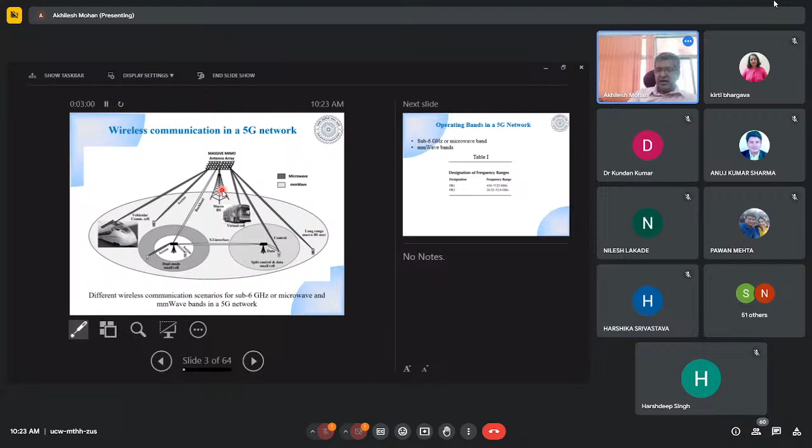Microwave is for the communication between the tower and the devices, the mobile phones or the networks, and the millimeter wave is for the backhaul or short distance communication. So these are the two major bands of frequencies which are going to be used for the full 5G network. Now, what are these frequencies? That we are going to talk about.

There is the sub 6 gigahertz microwave band. Sub 6 gigahertz means the frequencies below 6 gigahertz. It is basically the frequencies below 7 gigahertz. Just for the namesake, they have given it sub 6 gigahertz. Another are the millimeter wave bands.

What they have decided to use is FR1 and FR2, that is frequency range 1 for the microwave range and frequency range 2 for the millimeter wave. That is 410 megahertz to 7125 megahertz for the mobile communication, and for the backhaul or short distance communication, 24 to 52 gigahertz they have planned.

Based on these frequencies, they have given names to the bands, NR1, NR2 till NR95, for the lower microwave frequencies for different applications. For WiMAX, Wi-Fi, wireless LAN, and device-to-device communication, they have given a lot of specific bands. They are still allotting new bands, and each channel has a bandwidth depending upon its application, that is 50 megahertz or 100 megahertz.

Apart from that, they have given 4 bands for the high frequency, that is NR257, 258, 260, 261, for uplink and downlink. Now the main challenge is that in mobile communication, we must have both the bands at the same time. That I am not going to discuss here. I will discuss how to design the antennas for these bands, how to design the MIMO antennas, and what are the challenges in designing MIMO antennas at these frequencies.

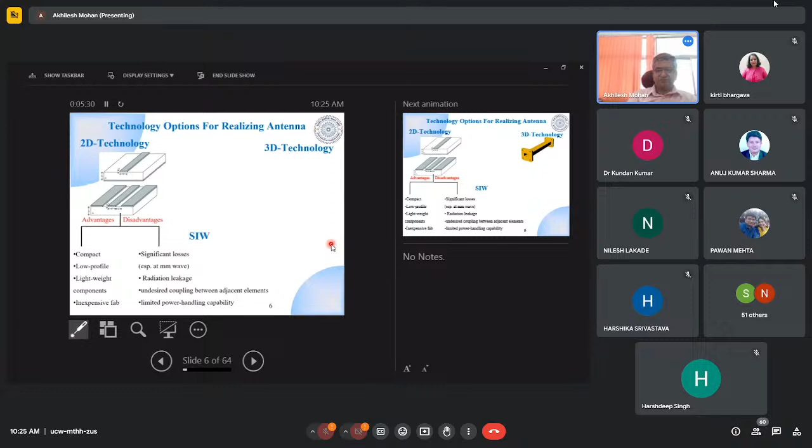The disadvantages are they have significant losses if we move higher in frequency, especially at millimeter wave frequency. They have radiation leakage and undesired coupling because most of the structures are open, and they have limited power handling capability due to the presence of the dielectric material.

Another technology is 3D structures. They have the advantage of low losses, good quality factor, and high power handling capability. But they are heavy, they require expensive fabrication, which requires a CNC machine, and transitions are required if you want to connect to planar circuits.

Researchers in 2000 thought, why can't we combine the advantages of 2D technology and 3D technology? So they came up with a new type of structure called SIW. It is a planar form of a rectangular waveguide, where the top and bottom walls are realized by the top and bottom cladding of the dielectric substrate, and the side walls are realized by a series of metallic vias. So this is called SIW.

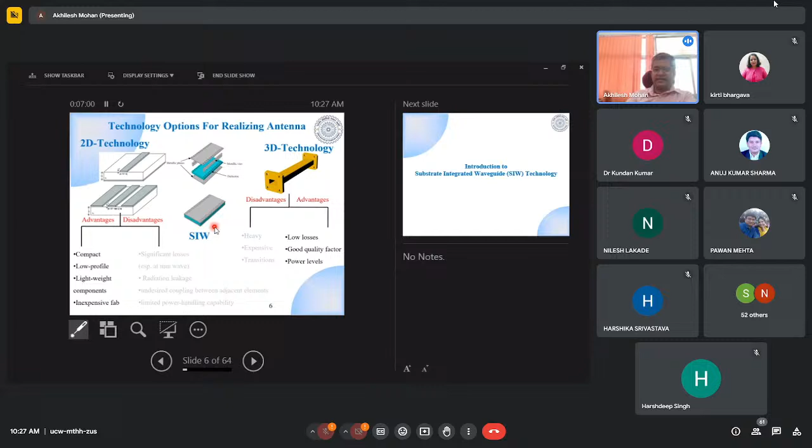We can say that SIW, substrate integrated waveguide, is just a rectangular waveguide filled with some dielectric material. So it has all the characteristics of the rectangular waveguide and some of the characteristics of 2D planar structures. It is a planar structure with characteristics of both technologies. Now, introduction to SIW technology. So, history.

So the word SIW was coined much later. Before that, there was a group in Japan that gave the waveguide line. They filed a patent in 1994, and they proposed a parallel plate waveguide which has similar characteristics to SIW. After that, they gave the development of the laminated waveguide.

Different names were given. But the major work was started by Wu and his group in 2000 in Canada. They established this SIW transmission line. They calculated its characteristic impedance, propagation constant, attenuation constant. They did all sorts of characteristics.

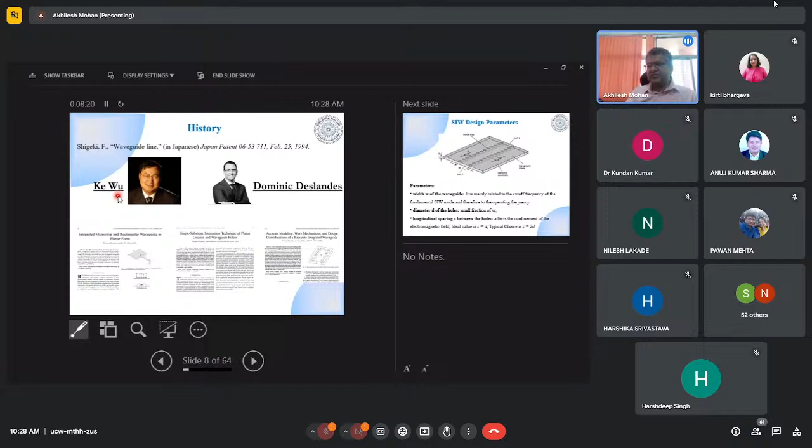At those times, computers were just there, so they did it by using empirical formulas, and they are still valid now. And they showed how the new technology can be used for the design of microwave components. In the next 20 years, numerous papers have been published, and SIW has been applied in numerous microwave and high frequency circuits for the design of filters, antennas, oscillators, with some better characteristics.

Now, some of the SIW design parameters. What are the design parameters? It is a rectangular waveguide, so it has a parameter, the width of the waveguide. It is mainly related to the cutoff frequency. As you know, the rectangular waveguide has a cutoff frequency, and the dominant mode is the TE10 mode. So SIW also basically supports the TE10 mode. Then there is the diameter D of the metallic via holes, and the longitudinal spacing between the via holes.

The ideal choice, to have an identical implementation of sidewalls, is S equals D, but the typical choice is S equals 2D. It has been found through EM simulation that if we choose S equals 2D, that is, separation between the vias equal to two times the diameter of the vias, the electromagnetic field will be confined in this structure and will flow. There won't be any leakage from this structure.

Okay, now SIW. As I told you, it supports TEn0 modes only. It doesn't support TM modes, because for the support of TM modes, it requires longitudinal, Z-direction current on the sidewall. Since the sidewall is discontinuous along the Z direction, it doesn't support the TM modes. It only supports TEn0 modes.

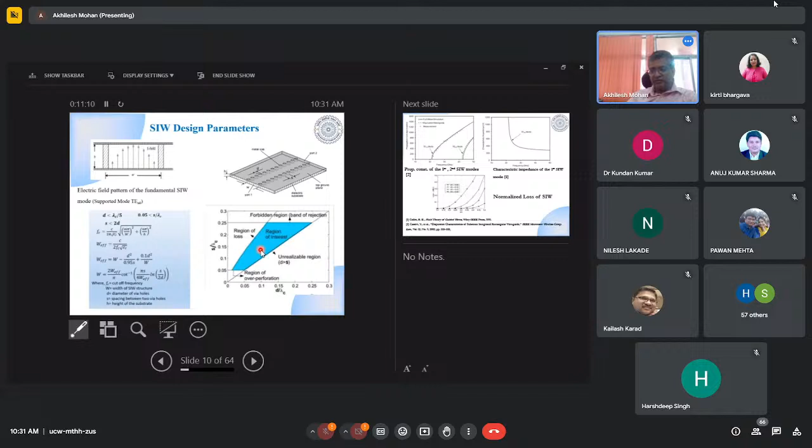You cannot choose any value of S and D, the spacing between the vias and the diameter of the vias, for the propagation of the electromagnetic wave. The blue region shown here is the only region of interest. Other regions are either unrealizable, the region of loss, or band rejection. So S by lambda C and D by lambda C have to be chosen only in this region for proper propagation of the electromagnetic wave in SIW, that is, substrate integrated waveguide.

Now, as I told you, for any transmission line we require the propagation constant and characteristic impedance, basically gamma and Z naught. The group calculated these numerically. They found that for the TE10 and TE20 modes, it is similar to the rectangular waveguide, and the characteristic impedance is also similar to the rectangular waveguide, and they provided a design chart which can be used for the design of microwave components.

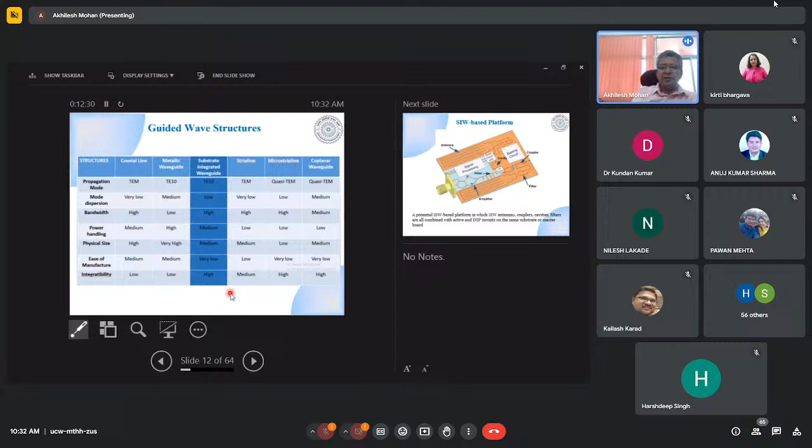Okay, so it is something in between. If we compare SIW, substrate integrated waveguide, with other guiding structures, that is, coaxial line, metallic waveguide, stripline, microstrip line, coplanar, it is not as good as a metallic waveguide, but it is in between. It is better than the 2D planar structures and somewhat inferior to the metallic waveguide, but with ease of fabrication and somewhat higher power handling capability than the other 2D structures. That is why it is more popular nowadays.

So this is one of the transmitters they have designed, or they have just shown how SIW, the entire thing is basically antennas, couplers, and they have oscillators. Most of them are using the SIW technology, and if you want to use it, you have to apply certain chips for signal processing and for down conversion. So this is how an SIW-based transceiver will look. So now we have to understand how to design the SIW antennas, couplers, filters, and so on. Okay, so I have discussed the advantages and the limitations.

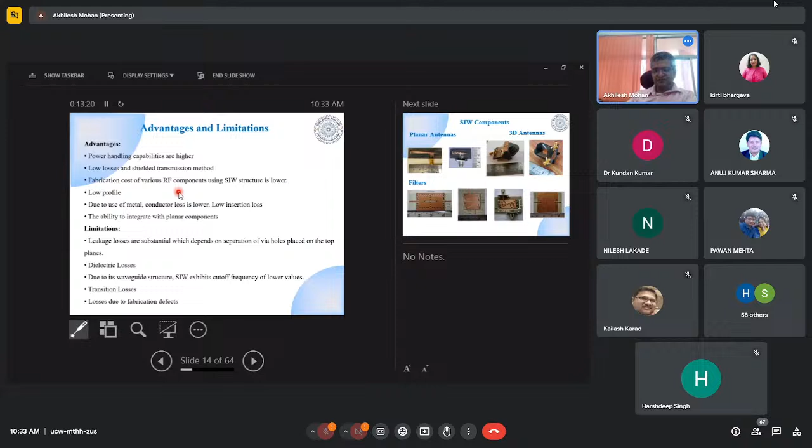So these are some of the components which our group has designed. We have designed some of the planar structures, planar antennas, 3D antennas, and planar filters. So now we will discuss the SIW antennas. Before starting, first of all, I will discuss the rectangular SIW cavity.

So this is a rectangular waveguide cavity. How is it formed? We have the same SIW technology. If we close the front and the back side with another series of metallic vias, we will get a cavity. This cavity will be equivalent to the rectangular cavity. It will have all the features, and all the formulas are applicable. The only difference is that earlier the length was LC and WC, now it has been modified to L effective and W effective.

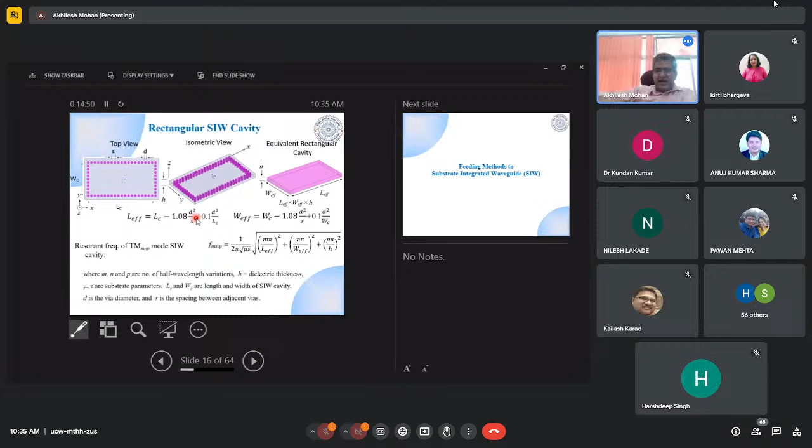This L effective and W effective are calculated empirically. They have calculated for different substrate parameters and different heights, and they have come up with some empirical relations. If we use this relation, we will get the correct resonant frequency of our SIW structure. Okay, now this was our rectangular SIW cavity. This acts as a microwave resonator, which we will be using for the design of antennas and filters.

Now feeding to the SIW. The main thing is that if you have any structure, you have to launch the power. So how do you launch the power? There are different types of feeding techniques. First of all, at this side you will have 50 ohm, and at this side you have the impedance of the waveguide, whatever mode you are choosing. So you have to match this impedance and this impedance. So a taper-based transition is used. This is very popular. This is one of the simplest transitions.

Apart from that, the coplanar to SIW transition, where a current probe is used, and another one is the coplanar to SIW with 90-degree bends. Here also you have the 50 ohm, and to match the 50 ohm to this one, 90-degree bends are used. Basically you have to match the fields of the feed line to the SIW in order to launch the power properly. Whatever power you are launching should not reflect back. It should go inside the waveguide.

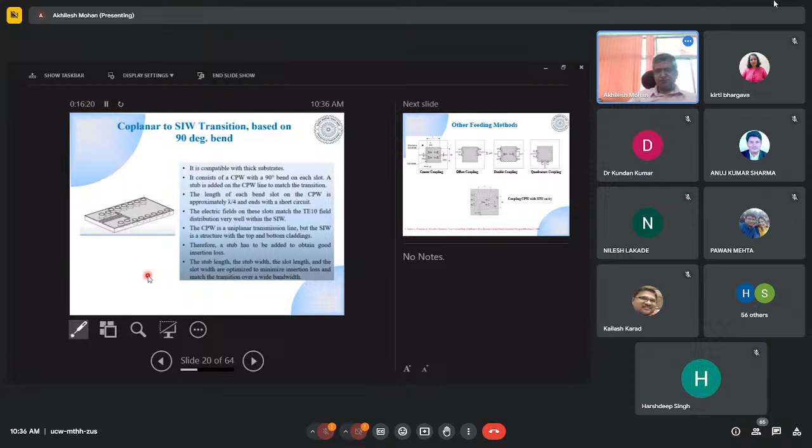Okay, now people have presented different other feeding techniques, that is corner feeding, double feeding, offset feeding, then quadrature feeding. Some of them have advantages, some disadvantages. When I discuss some of the components, I will discuss what type of feeding technique you should choose.

Okay, now first of all, we should study the modes of the SIW square cavity. So this is your SIW square cavity. As I have shown you the rectangular waveguide cavity, this is just a square. Its 2D view is something like this, and the 3D isometric view is like this. Now in the 2D view, I have plotted for this dielectric substrate the first few modes, that is the TE110 mode.

So basically it supports, as I told you, the TE MN0 mode. It will not support TM modes because the waveguide walls are discontinuous. Now, TE110: the first index shows the number of half-wavelength variations along the x direction.

The second index shows the number of half wavelengths along the y direction, and the third index shows the number of half wavelength variations along the z direction. So in this nomenclature, this is your x, so it has one variation along the x direction, and along the y it also has one variation, and there is no variation along z because the thickness is very small. H is very small compared to the other dimensions, so there is no variation of the fields along the z direction. That is why it is TE110.

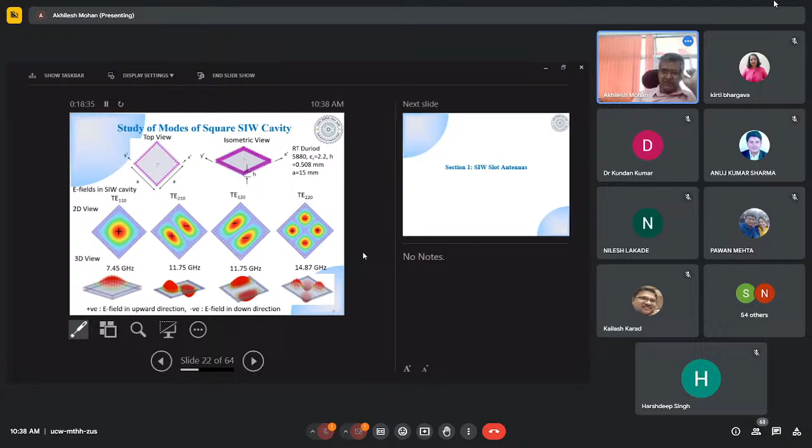Now, SIW slot antenna. First I will talk about the slot antenna. What is a slot antenna? A slot antenna is basically a metal surface, usually a flat plate, in which one or more holes or slots of different sizes are etched or cut. Now this slot will radiate. It will act as a dipole.

Go back and study what the Babinet principle is. A slot acts like a dipole, in a similar way to a dipole antenna. So it will have an omnidirectional radiation pattern. Only the plate is there. So it will have an omnidirectional radiation pattern, and a figure-of-8 pattern in the two planes. The shape and size of the slot determine its resonant frequency, the operating frequency of this antenna.

Now, the main advantage of this slot is that it's very simple and you can design it in a planar structure. You just take a sheet and it will radiate. But the disadvantage of this slot is that you have radiation at both ends, front and back. If you want to design a directional antenna, it should radiate only in one direction. That is why this slot has been modified with a solid cavity kept behind it. That is called a cavity backed slot antenna.

Here, this cavity is of λ/4 thickness because it is shorted here. So it should not load the slot, because a λ/4 shorted section acts as an open circuit here. So this will act as a radiating slot. When you excite this cavity in a particular mode, this slot will radiate.

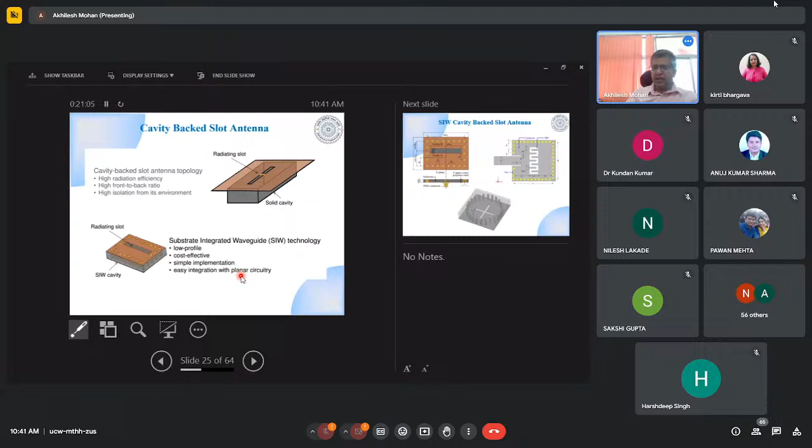Now, for the cavity backed slot antenna, you can find numerous different types of slots in the literature. The theory behind everything remains the same. You have to excite a particular mode of the cavity, feed the cavity, etch a slot, and this slot will radiate at the desired frequency. Here they have taken a rectangular cavity, a square cavity, and a circular cavity, and different types of slots are etched. The theory is all the same.

So what is the design flow chart? You have to choose the cavity, then study all the modes of the cavity. SIW will have different modes. As I showed you, TE110, 210, 220, and all the modes are there. So you have to first look at the cavity, then the mode pattern and the field configuration of these particular modes.

Then you apply, this structure will support the modes, then you apply the feeds to excite the particular mode, then place the radiating slots at the strategic location. That I will tell you how to do. Then finally this slot will radiate and you will get your cavity backed slot antenna, and you can get it for the different dimensions, impedance, bandwidth, polarization depending upon the requirement, and finally you fabricate it and you will verify the characteristics. So this is the design flowchart of your cavity backed slot antenna.

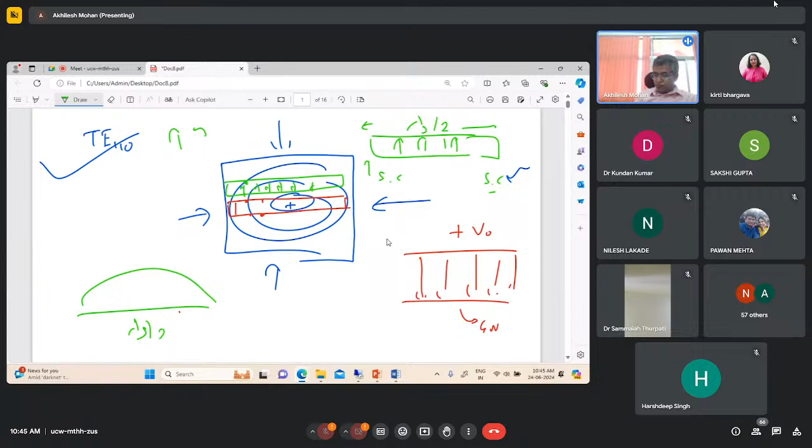Let's say this is your Y. So a Y polarized electromagnetic wave will be radiated from this slot antenna. It uses only the TE110 mode, the first mode, and this length will be lambda G by 2, because it is short circuited here, and the length between two short circuits is lambda G by 2. So its bandwidth is very small, around 1.7%.

Now we want to increase the bandwidth. So we can use the higher order modes. How to use higher order modes, this I will discuss. Here they have used TE110 mode and TE120 or TE210 mode. Let's take TE120. You will have fields like this and this. So this is plus, this is minus, and this is TE110 mode, and TE120 mode here plus.

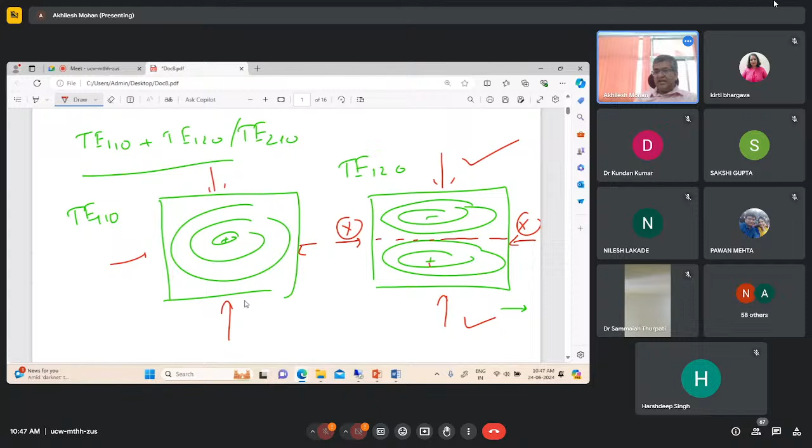Now, if you feed from this side, both the modes will get excited. But if you feed from this side, this mode will not get excited. Why? Because this has zero fields. It is maximum here, then zero, and then minimum. So you have to feed from either this side or this side, and then both the modes will get excited.

So we will feed from either this side or this side. Okay, so this mode and this mode, both will get excited, plus minus. Now the question comes, where to etch the slot? If I etch the slot at the center, will it radiate?

It will not radiate, because as I told you, it will have the equipotential. But if I etch the slot here, then what is going to happen? It will radiate because there is a potential difference. So as I told you, positive to negative, so it will radiate.

But if I etch a slot at any other location, let's say at this location, then what is going to happen? Both of them will radiate. Why? Because here you will not have the equipotential surface, so you have the potential difference. Also you will have the potential difference, so both slots will radiate.

So this works. They did it here in the second example, where they have taken an offset from the center. One more thing, they have made the cavity rectangular to bring the second mode closer to the first one.

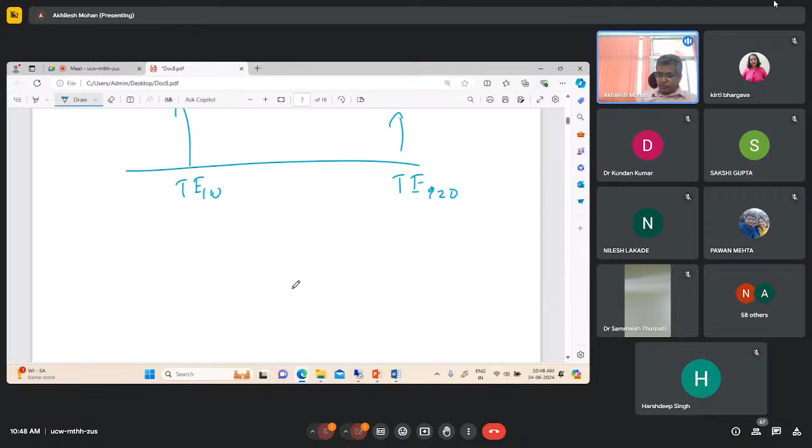So to bring the second mode earlier, let's say TE110 mode is here and TE120 mode is here. As you know the formula of TEMN0 mode, it is something like m pi by A, n pi by B, plus p pi by C, whole square.

So now if I choose in such a way that the width of the waveguide is longer, then this mode will be brought closer to each other, so it will become 1 to 0.

Now these modes can be amalgamated and you will get the wideband response. So in this case they got the bandwidth improved from 1.7 to 6.3 gigahertz.

Another one is they have designed the SIW, which is much broader. As you know, butterfly shaped structures are known for their wideband characteristics. So basically butterfly structures are wideband structures.

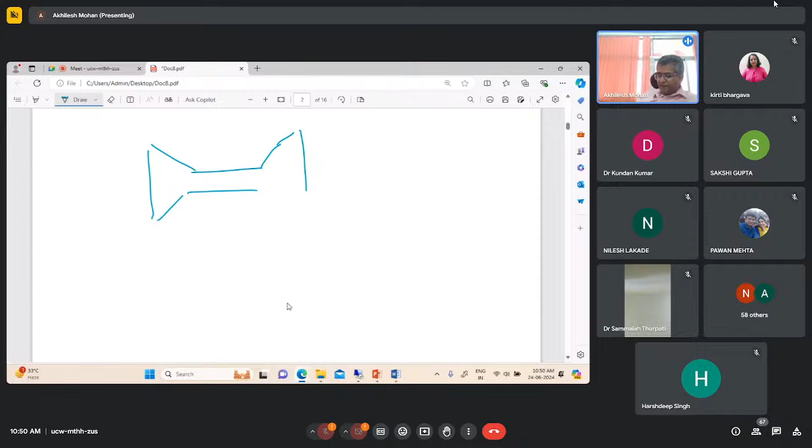So what happens, you have the butterfly, something like this. It is basically etching multiple slots of different lengths. First they take a broader length, then a shorter length, and so on, so it becomes just a wideband structure, and you get the wideband characteristics.

So these are some of the SIW slot antennas. Now, how to use this slot antenna for the design of the MIMO antenna, that is the SIW MIMO antenna, that they have shown.

This is the simplest one, presented by Z. N. Chen in 2015. They have straightforward introduced it at the center and center fed it. Four different type cavities are kept side by side, and they have applied orthogonal polarization such a way that the isolation between them will be high.

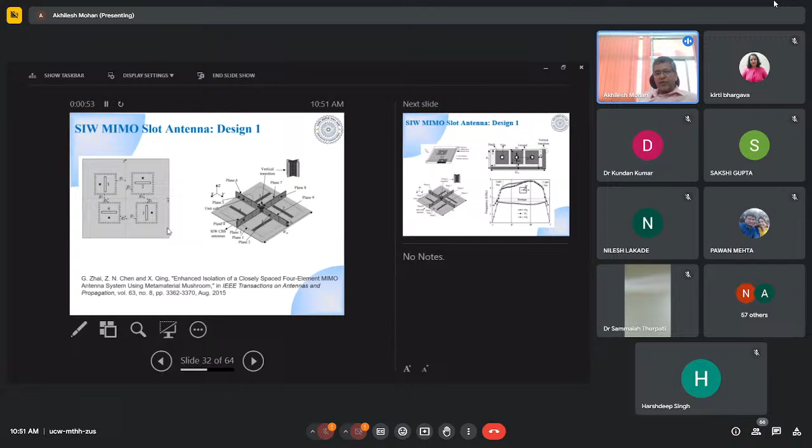Apart from that, they have applied metamaterial based structures and calculated its propagation constant. This metamaterial structure's omega-beta diagram shows band gap characteristics. They have designed the antenna for 2.4 gigahertz and designed the band gap structure such that its band gap lies at 2.4 gigahertz.

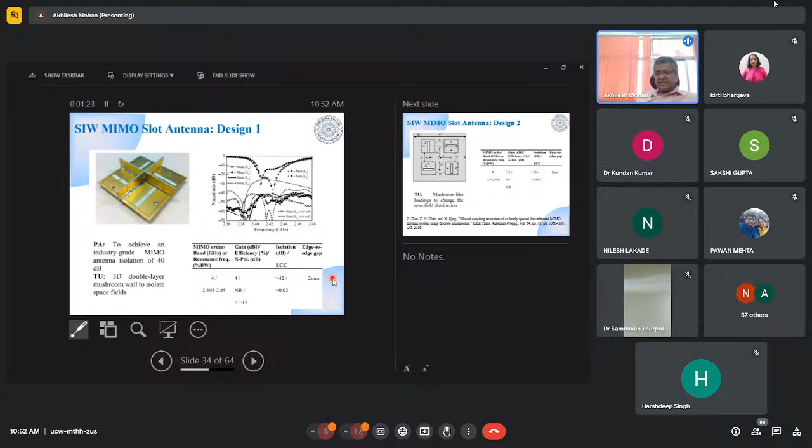So there won't be any flow of electromagnetic power from this side to that side, giving better isolation between the MIMO antennas, as shown here. They got very good isolation of 42 dB, with an edge to edge gap of only 2 millimeters, which is very small.

So they got some isolation of 25 dB. Now another one from the Kundan itself. So what they did is they have used some half mode structures kept side by side in such a way that they applied the orthogonal feeding structure.

Also, they got isolation better than 24 dB. In all the above structures, they have applied some decoupling network type of structures, mushroom-like structures, and something like band gap structures, and they have got it.

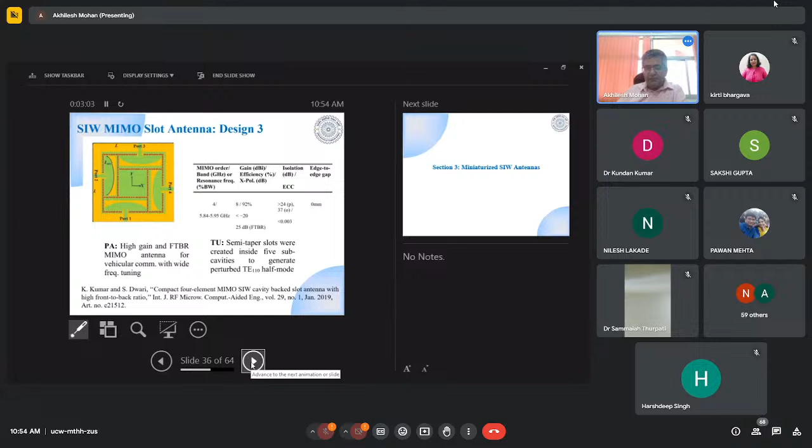Now another is miniaturized SIW. This is my third section of my talk, miniaturized SIW antenna. So what do you mean by miniaturized SIW antenna? All these modes, if you see, are using the full modes. Full modes means you have the full SIW cavities for the design of the SIW antennas. Now several miniaturized versions of the SIW antennas are there, which are used for the design of MIMO structures. So what are they? I will discuss here.

So we have the circular SIW cavity whose dominant mode is TM010 mode. Now this is your full mode. Now if I apply the magnetic wall concept, meaning an open circuit concept, then what happens? If the fields are symmetrical around any plane, applying the magnetic wall concept allows you to bifurcate or reduce the size of the structure by half while retaining its characteristics. Resonant frequency, everything will remain the same, so the size will be reduced to half. This is called half mode SIW cavity, something like a semicircular cavity, so half mode.

Similarly here, if I bifurcate along here, the first cavity is bifurcated along any plane, so you get half mode. Now if I bifurcate along this, the basic thing is you have to bifurcate along the symmetrical plane. If you apply bifurcation here, you will get the quarter mode. Similarly 8th mode, 16th mode, and so on. This is circular cavity bifurcation.

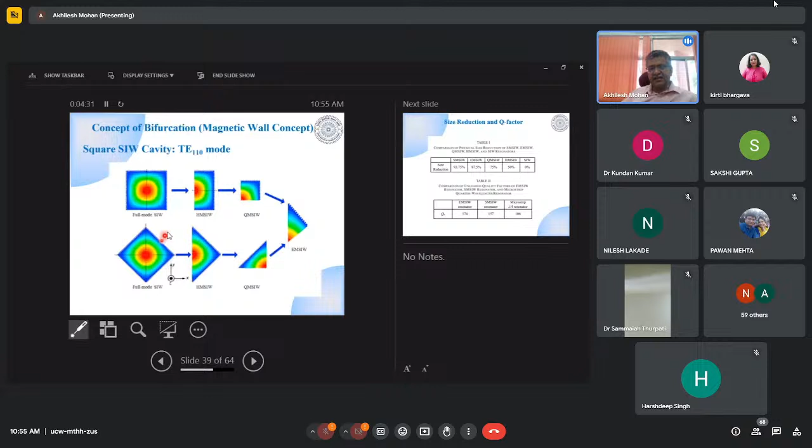Similarly, you can think of bifurcation in the SIW cavity, whatever I have discussed. So full mode, half mode, quarter mode, 8th mode. This is bifurcation along the center. If you bifurcate along the diagonals, you will get something like this - half mode, quarter mode, and EMSIW. So all these structures have similar characteristics, but size will be reduced to half.

Now comparing this with the other SIW structures, the size reduction in the 16th mode or whatever mode - if you have full mode cavity, it is 0%, similar. Now half mode gives 50%, so significant size reduction is obtained. Also, if you observe the quality factor of these things, it is more or less similar, not much degradation. If full mode has a cavity quality factor of 200 something, it will have 175 or something like that. So basically it is somewhat reduced, but the size will be drastically changed.

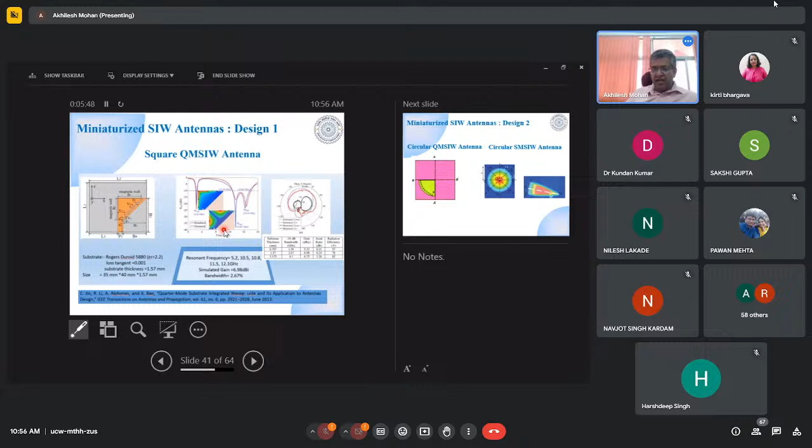Now if you see the circular SIW cavity, what happens? In circular SIW cavity, this is quarter mode and this is 16th mode. If fed from a coaxial feed, what they got is circular SIW antenna radiation characteristics. So we can use this type of antenna for the design of MIMO antennas.

So the miniaturized SIW antennas for microwave, that is for MIMO antennas - now the first example is shown here. They have taken two QMSIW cavities, coaxially fed, and applied a decoupling structure at the side walls. To get good isolation, they achieved an isolation of 18 dB. And another one there, it was 2 cross 2, meaning a 2 port MIMO structure.

That is for the 5G MIMO antenna. They have realized that. Now another is for high order, they have applied the 4 type QMSIW structures. This structure is much more simpler or compact than the full mode structures presented earlier, but isolation is somewhat poor. However, there are different methods by which we can enhance the isolation.

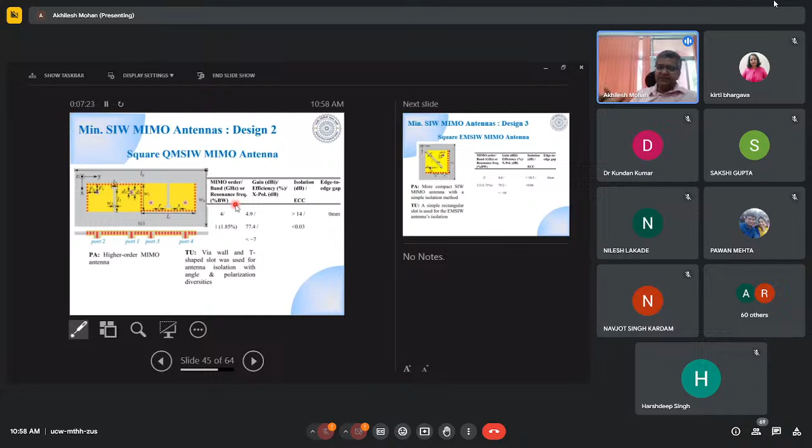20 dB isolation can be easily obtained by etching the slots or by placing the VRs. Here they have placed 2 similar structures like this and this one. So they have used a further 8th mode, and isolation of nearly 18 dB has been obtained.

After that, numerous types of structures can be used, and it is up to you how you place this structure to get the polarization diversity or pattern diversity, to get the enhanced isolation.

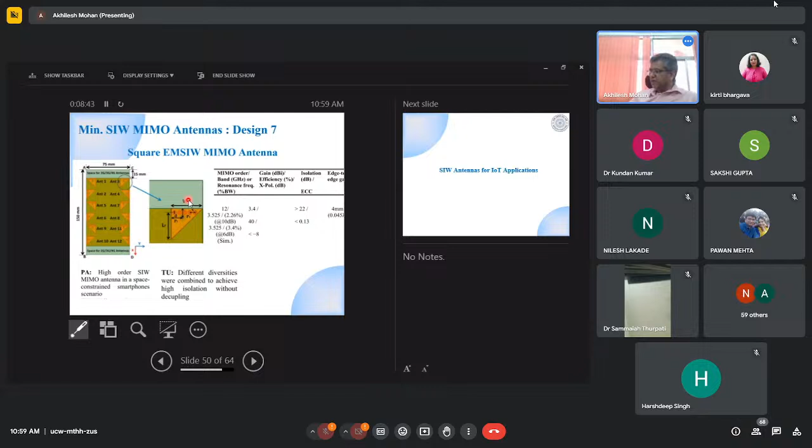Now if you have any questions, you can ask me, then I will progress further.

Questions? So, any questions from the audience participant side? I think you can continue, we will take the questions at the end of the session.

Okay, so now, as I told you, only 5 to 10 minutes are left. So now SIW slot antennas for IoT applications.

IoT, that is Internet of Things applications. For IoT application, your materials should be environment friendly, because they are going to be used in bulk, so it should be green and recyclable. So what people have used is organic materials, such as cork, or leather, or some textile for the design of the antenna.

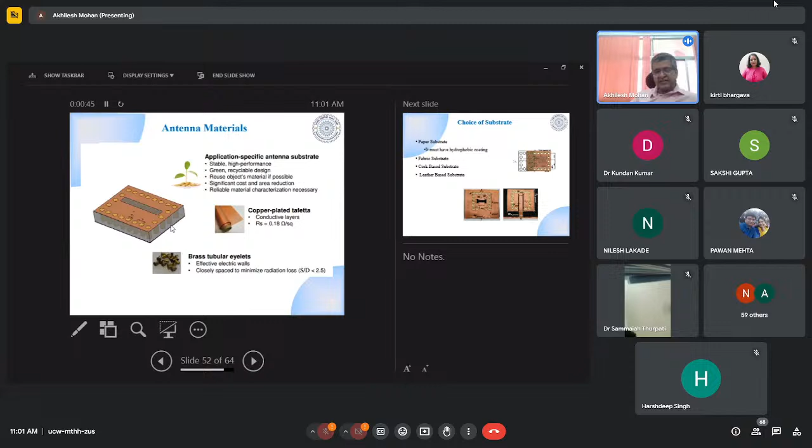So they have used this cork structure. For the top, they have used something like conductive copper, some polymer. For the side walls, they have used rivets. So they have designed cork-based SIW based antennas, where they have used fabric substrate, cork substrate, and leather substrates.

One more thing: before designing any structure, you must know the characteristics of the materials you are going to use, that is, you have to calculate its characteristics. There are different methods, such as the Nicolson-Ross method, by which you can experimentally calculate the material characteristics, permeability, and the tan delta of the material. Once you know these things, it's straightforward to use for the design.

So they have used some textile-based materials for the design of the SIW antenna. Everything remains the same, the principle remains the same. They have applied all the same modes, like the TE110 mode, and feeding, only they have replaced it with some user-friendly technique and user-friendly materials.

Also, since this is applied for body area network or maybe any application, whatever will be bent up, you have to calculate how your antenna behaves in bending. For example, here a firefighter is shown, so if I apply it on his hand, you have to find out this characteristic. While designing, you have to take care of the bending, how it affects the radiation characteristics of the antenna, and take all these things into account.

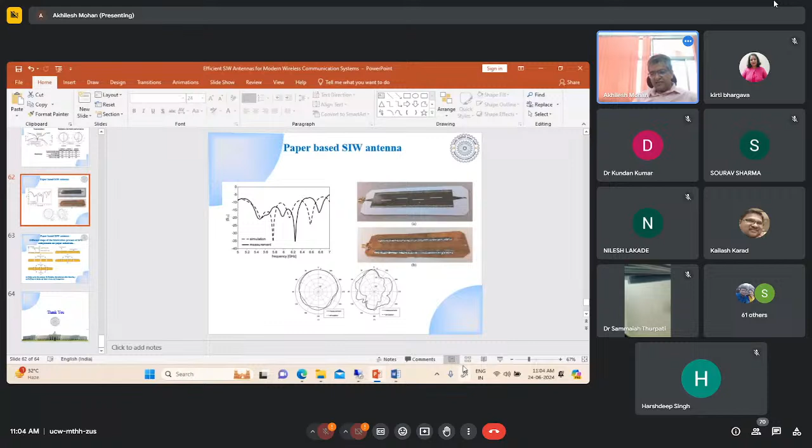Paper, see, it is something like this. I have not done it. So it is something like copper tape. In the market you will get the copper tape. The paper: first of all, you have to characterize the paper. The paper can be hardboard or it can be just a thin paper. Let's say you take some hardboard. Calculate its permittivity and permeability.

By the method I have discussed earlier, that is the resonance perturbation method, or a simpler method: make a cavity, put the material in the cavity, tightly filled, and measure its change in the S parameter. Generally we do these experiments in the BTech. So you calculate the epsilon R and the tan delta of the material. Any material can be easily characterized. Okay, sir. Tan delta and the epsilon R of the material.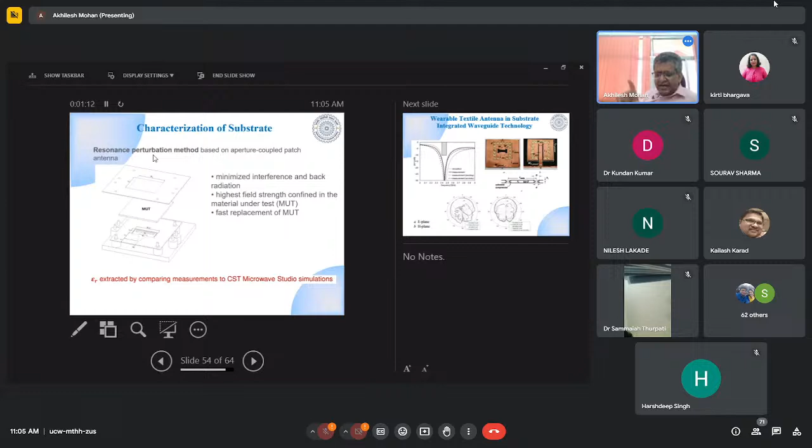Once you calculate these two things of the material, that is the permittivity and the loss tangent, you use them while designing your antenna. Now, simple copper tapes are available in the market. Yes, sir. Copper. You can go to Google, Amazon also. You can find the copper tape. Yes, sir. Simple copper tape. If you see, it is visible.

So copper tapes like this are available, and whatever PCB fabrication technique you use, you apply these things on the PCB or any other material and do the chemical etching. We don't do it; here a lab is there, so they perform the chemical etching. If you do the chemical etching of this copper tape, then apply it on the paper and connect the connector, the paper antenna can be made. This is the way by which the paper antenna can be made.

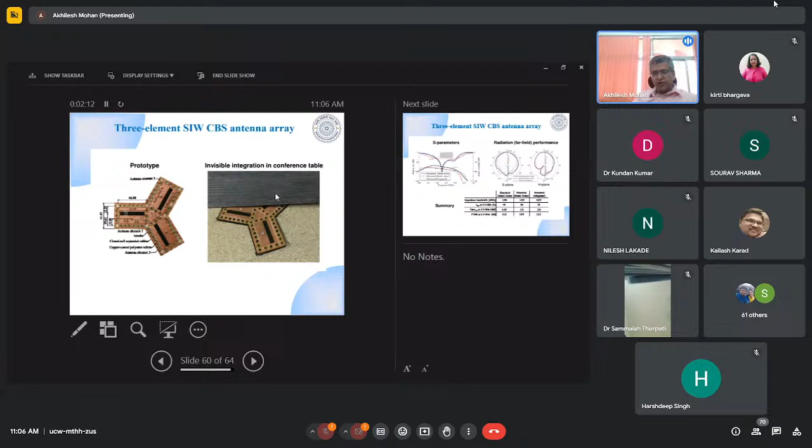In similar fashion, you can make the cork-based or wearable antennas. In the literature, if you see, they have used some fabric. You can use this fabric to characterize the material, then you get the epsilon and tan delta of the material. Then you apply this tan delta and epsilon in the design, design the antenna and get it fabricated. Yes, sir.

Sir, one more thing. Can we call them flexible antennas? You can call it a flexible antenna, no problem. Yes, sir. Okay. And one more thing, if you want to apply these things, you have to do the analysis I have talked about, the bending analysis: how it behaves when it is flexible, when you apply it on some structure, and how the radiation characteristics will change. Yes, sir. Thank you, sir.

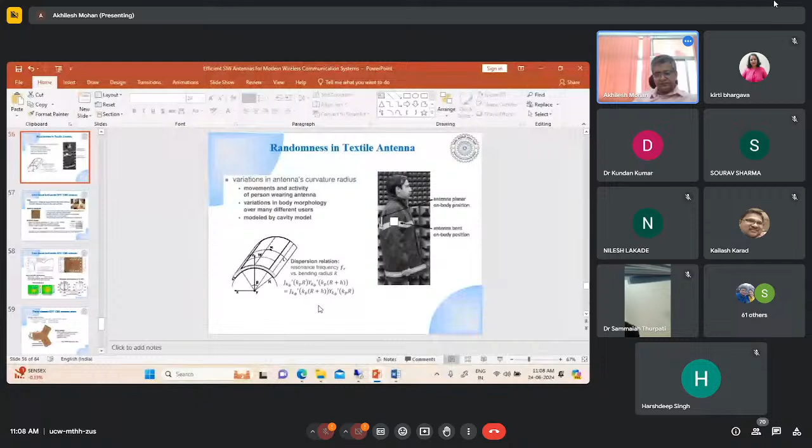Okay. Any other question from the participant side? How many of you are working in the antenna domain? I am seeing near about 70 participants. How many of you are working in the antenna domain? Okay. Any other questions? Any questions from the participant side? So, sir, I think there is no question from the participant side.

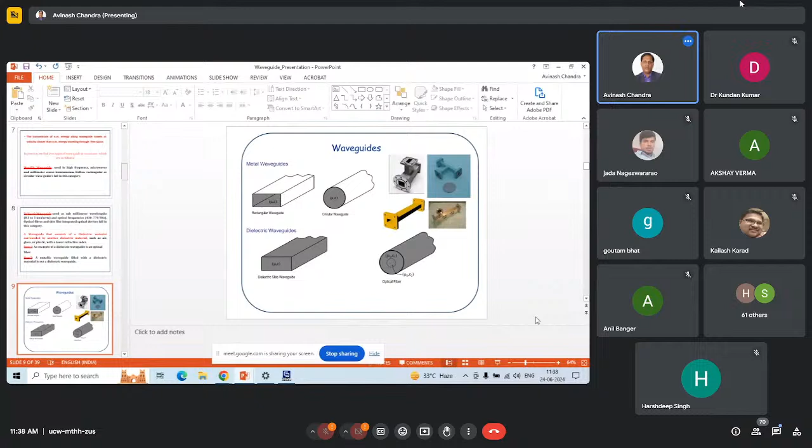So these are the different waveguides like metallic waveguide, circular waveguide, or twisted waveguide. These are some examples of the waveguide. Where does it have applications? We have a slotted antenna, which we find in radars, because it has very high gain, high power handling capability, low loss, and easy fabrication. It is capable of giving vertical and horizontal polarization.

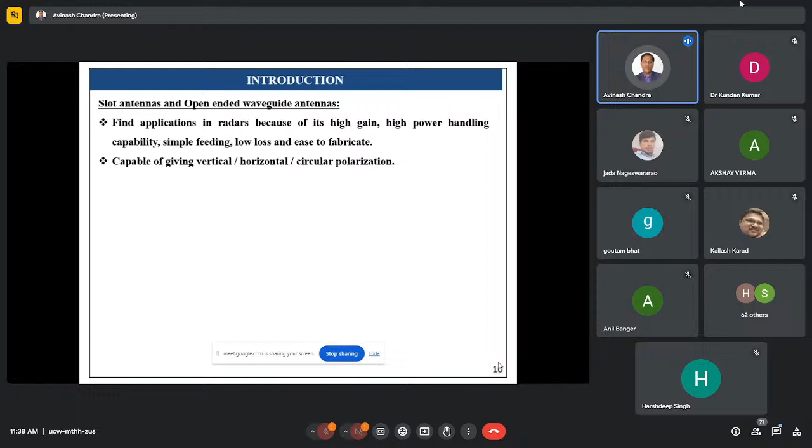Researchers have different doubts, like right now everyone is working on planar antennas, so why are we going for the waveguide? Just 2 weeks before, I visited the microwave tube lab of DRDO. That is a dedicated lab for making klystron tubes and waveguide components. Everyone is going to work on terahertz antennas. So we had a discussion with the scientist, Santanu is there.

As per the discussion, they are asking us to design a slotted waveguide antenna that has very high gain, practically we have to show a gain of 45 dB, and we are going to generate a power of 100 kilowatts. Practically, it is very difficult to get a gain of 45 dB because they are asking for the practical gain. So in simulation, we have to maintain a gain of at least 50 dBi.

It is very difficult to get a gain of 50 dBi from any planar antenna or any type of planar structure. So we don't have any options, only the waveguide is there. So how are we going to design this? Design constraints are given. Within a couple of minutes I will explain each and everything.

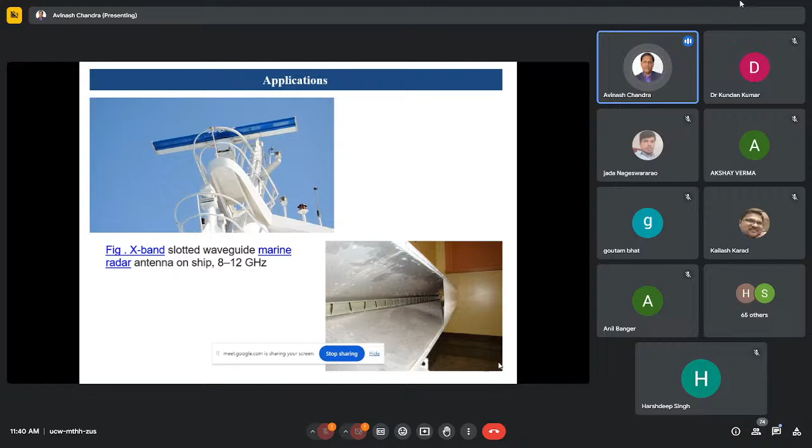So where is it applied? If you go to the airport, or a marine radar, in marine radars also we have waveguides, a slotted waveguide. I have taken this picture from the internet. That is the slotted array, a radar that is used in the marine ship. Other applications: we have anti-ship missiles. There also we have a slotted waveguide.

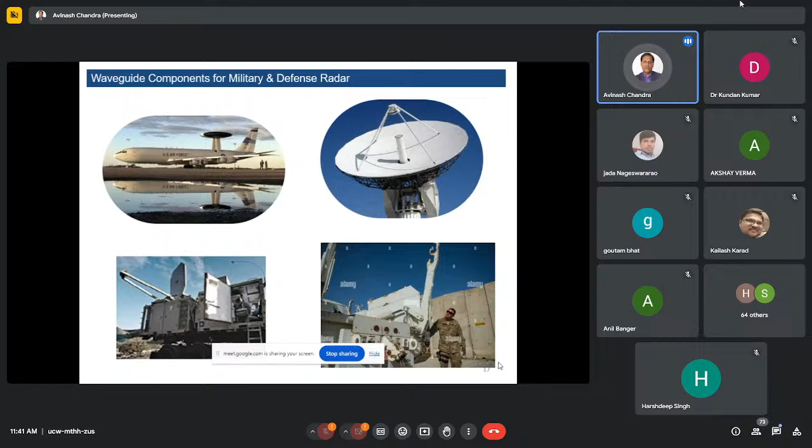In Antarctica also they have placed a circular waveguide, and inside that slotted waveguides are there. So everywhere, especially for defense purposes, or maybe for radar or satcom applications, waveguide components are going to be used. Either an antenna is there, or filters are there, or maybe couplers are there. Maybe the complexity and designs are going to be different depending upon the applications.

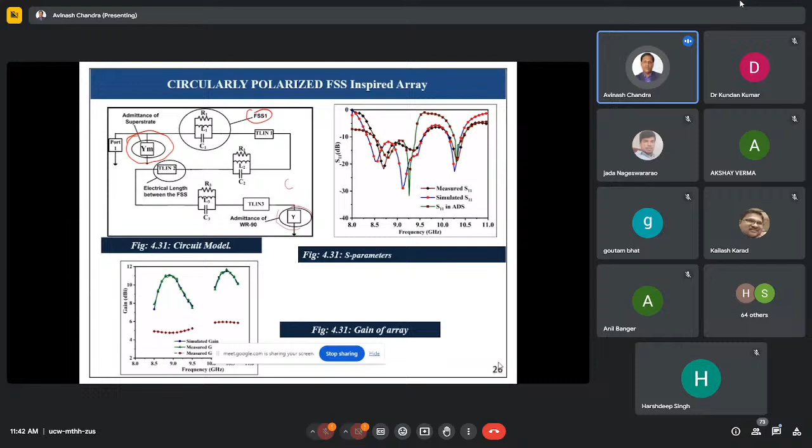But if I'm going to conclude the applications, basically waveguides mostly have application in the defense sector, or maybe radar or satellite communications. So we have designed different types of waveguides. I am just going to scroll, because this session is a hands-on session, so I will design all the waveguides one by one, right?

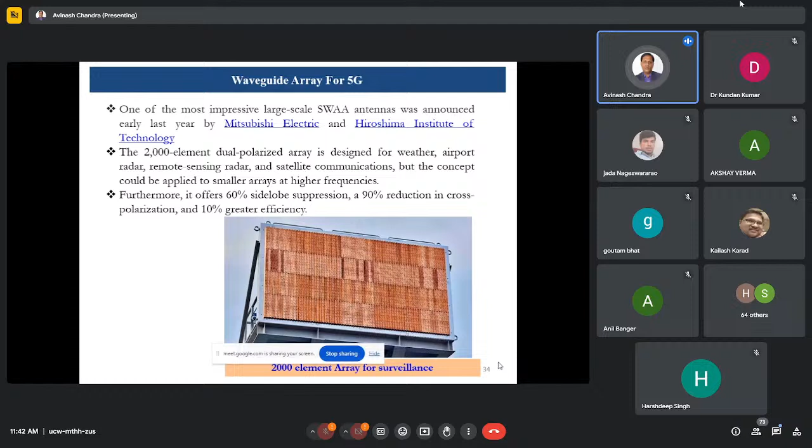So these are the circular coaxial type of circular waveguide. It is going to be used for millimeter wave applications, and you can observe here the 2000 elements of slotted waveguide. It is going to be installed in the Hiroshima Institute of Technology, and that is going to be used for surveillance purposes. Another type of waveguide, a groove structure, is going to be added. Recently it was published.

So, in 5G technology or millimeter wave technology, the concept of gap waveguide is coming up. Different research groups are designing different types of slotted waveguide antennas, like a waveguide having a groove structure, or gap waveguide technologies. So they are going to design antennas or filters for 5G applications.

So now, because this session is your complete hands-on session, I'm going to share the basics of how to create a project in CST. For the first 5 to 10 minutes I will explain through the PPT how to create the project, and then we'll go directly to CST to design different types of antennas, filters, and couplers or magic T with the help of CST Studio.

So in CST Studio, if you are going to design any waveguide component, first the target is where we can use it. Which applications are we going to design for, whether you have designed an antenna or filter for Bluetooth applications or the ISM band, or maybe for X band applications, for radar, for satellite. So depending upon the cost, you can choose the frequency range.

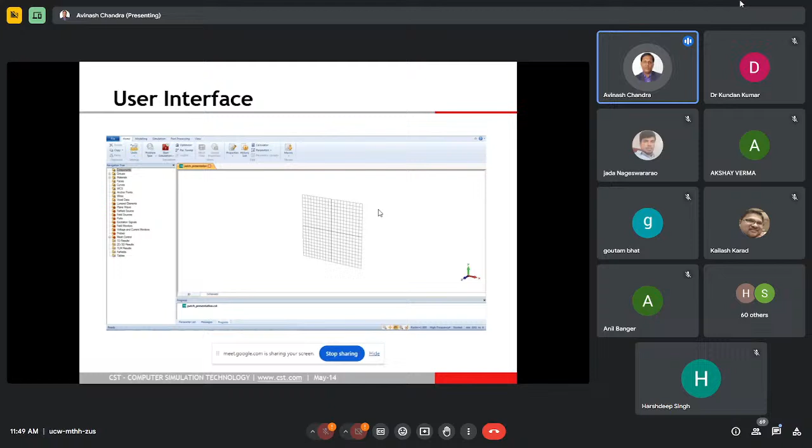Now I'm going to take a general example. Let us suppose that you have to design a planar microstrip antenna that is going to work on 2.4 gigahertz, or maybe 9 gigahertz, or any operating frequency. So what do we need? First, substrate material. Your substrate material may be FR4, or maybe Rogers, depending upon the application. If you are going to work on a wearable application, maybe the material is jeans.

Next, in any antenna we have three things: the ground plane, the substrate, and the radiating patch, right? If I'm going to take a normal patch antenna, what we have to think: what material we are going to choose; next, the patch, that is the radiating element; then the substrate, what is the dielectric constant. Let's suppose you have FR4 material that is easily available, so you know that the dielectric constant is 4.4. Then the ground plane is there and the connector is there.

So here also different feeding techniques are there, like microstrip feeding, CPW feeding, and coaxial feeding. So here for illustration purposes, let us suppose that I am going to take a coaxial feeding technique.

Now the important thing is, for any RF or microwave component, first you have to decide on which frequency you are going to work, right? In the waveguide, mathematical calculations are there, but in planar antennas, some hit and trial methods are there. Some mathematics is also there, right? So first you have to select the operating frequency of any antenna, filter, or coupler. Once you have selected the operating frequency, then you can design. For this tutorial, we have selected the operating frequency 2.4 gigahertz.

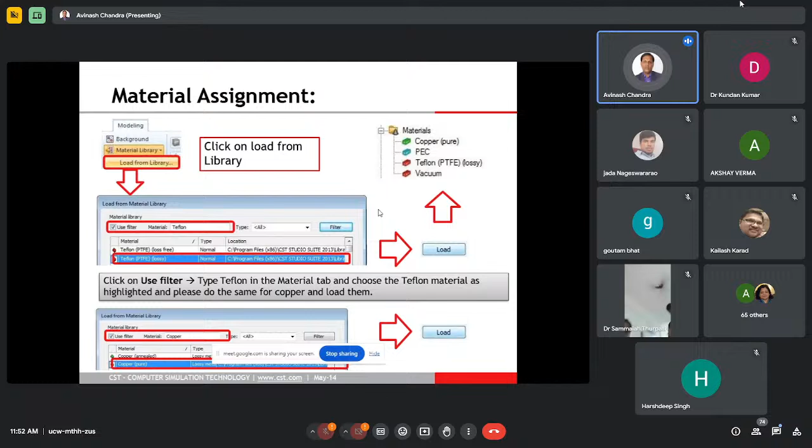Once you have calculated this value, if the material is available in the library, you can easily select the material, right? Like copper, or maybe alumina, or Teflon, or Rogers, or FR4. Some popular materials are available, but suppose you are going to work on an advanced antenna application, maybe some materials are not going to be available. Or let us suppose that you have designed a material, so in that case, how are you going to define it?

So first you can assign the material. For material assignment, one is the relative permittivity, and another is the loss tangent. Once you have defined the material, then you have to design the antenna. You have to construct a patch, a ground plane, and you have to design a substrate.

Either you can put the dimensions directly, but generally we are not going to put the dimensions directly, we are going to put the variables. Why are we going to put the variables? Because sometimes, if you design any antenna or filter, your result is not going to be appropriate or suitable for a particular application. So you need optimization, and for that, again, you have to change the dimensions.

So better you put it from the beginning onwards, once you have created any project. By defining the dimensions, you can put variables like A, B, C, D, etc. Let us suppose that in this case we have put the length and width. The dimension is going to be defined from minus L by 2 to plus L by 2. If you click OK, they are going to ask what is the dimension of L, what is the dimension of TS. Once you have put the dimensions, your substrate is going to be created.

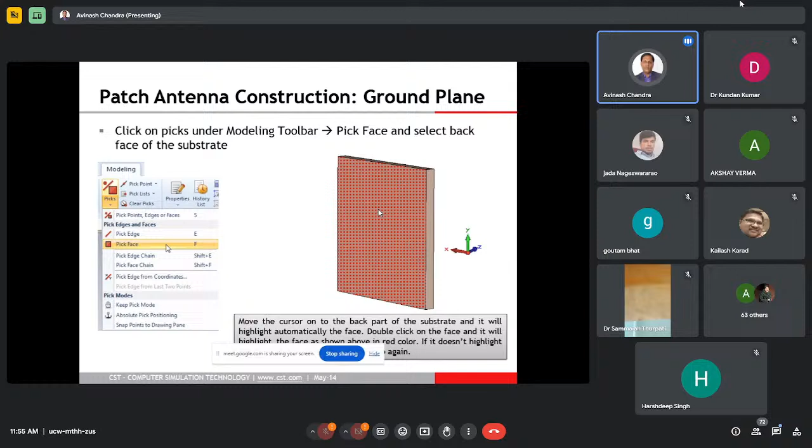But in CST, no need to remember any dimension, what you initially put for the ground plane or the height of the substrate. We have one local coordinate system, called the WCS. You just select the face, and after selecting the face, you can align the local coordinate system, the WCS. Once you have aligned it, it automatically sits on the surface. So you can create the ground plane, you can create the radiating patch.

Once you have created this, there are two things here. We have taken a coaxial feed. For the coaxial feed, you have to put three cylinders. The first cylinder has an outer radius of 2.5 to 2.25, and the material is PEC. The next inner cylinder is Teflon material, having a dimension of 0.63 to 2.25, and the last cylinder, 0.63, is PEC, and the pin goes inside to your patch.

Another technique is the microstrip feed line technique. So you can put the feed line. For feed line calculation, there are online calculators. You just put in the width of your radiating patch, all the calculations and the permittivity, in the online calculator.

For impedance, how much we have to put for 50 ohm? You all know that in microwave there is a trade-off between low losses and maximum power. So in this case we have taken 50 ohm, and for 50 ohm we are going to do all the calculations. So either you are going to design a microstrip feed line, CPW feed line, or coaxial line, you have to think about this. We are going to calculate for a characteristic impedance of 50 ohm.

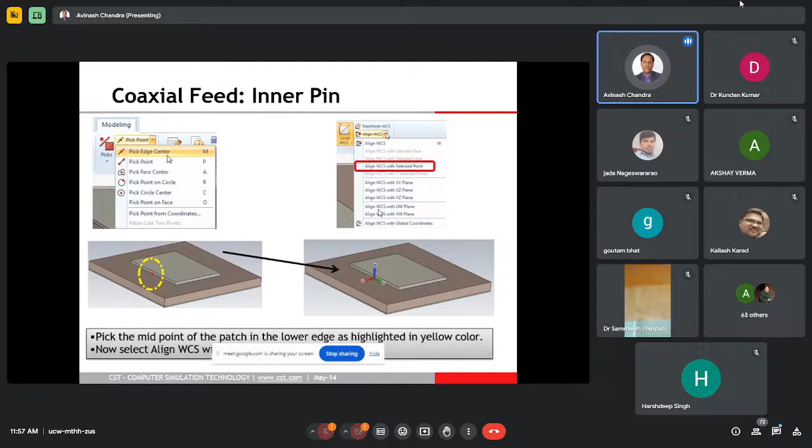So once you have created this one, then coming to this, you have to define the frequency range, for which frequency we have to design. Let us suppose that I am going to put 0 to 6. Depending upon the application, you can put the frequency range.

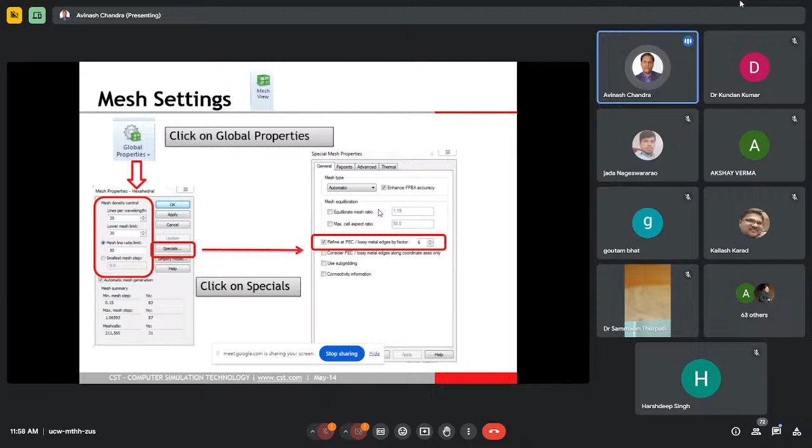Once you have selected the frequency range, here you can see that no need to select the mesh. Right now, this one we have taken from the old CST Studio Suite. In the 24 version, automatically mesh calculation is going to be done in the software. So once this calculation is done, you have to put the excitation.

Excitation means you have to define the port. For defining the port, you just see the yellow color line. Here we have defined the coaxial feeding, and we are going to define the port. So this is the antenna, and only one port is going to be needed.

So first we are going to select the face, and we are going to define the port. Once you define the port, two types of ports are there: waveguide port setup and lumped port setup. So we are going to define the waveguide port in our case.

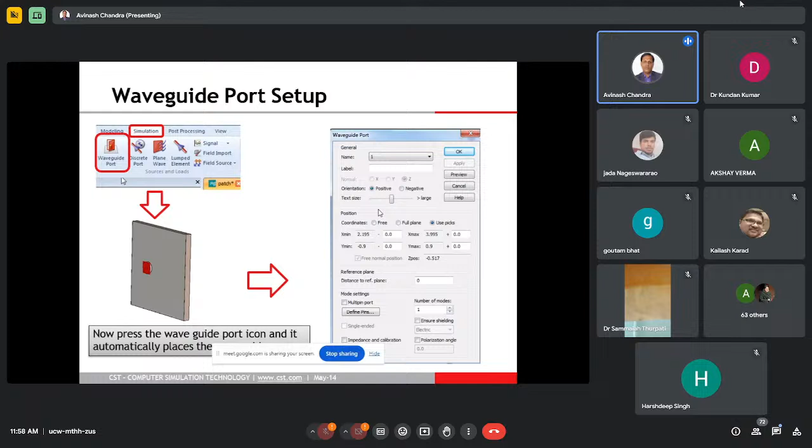So once we have defined the port, then it comes to the boundary conditions. In HFSS, generally we have to make a boundary, but here no need to make the boundary in the new CST. Actually, new versions of CST directly take the boundary, because initially we selected a particular application and created the project based on that, so no need to define the boundary, automatically it takes the boundary. Some special cases are there, we'll discuss in detail later.

So once you have defined the boundary, for antenna we have the near field parameter, that is S parameters, and we have far field parameters like gain and directivity. Also surface current distributions are there.

Here in the CST navigation tree, you can see in the box we have the field monitor. So what we have to see, like radiation pattern, gain, you have to select the far field. Let us suppose you have to see which component contributes, like if we have designed any radiated element, which particular section is going to contribute the current.

So how we can see this is by using surface current analysis. In the monitor we have E field, H field, surface current like current density, and far field. So basically for the antenna cases we have to concentrate on H field, surface current, E field, and far field analysis. In the far field, two things are there: one is frequency, another one is broadband.

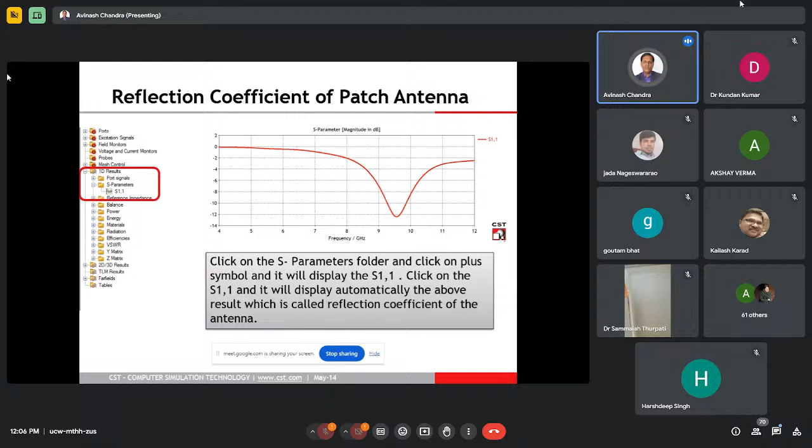In the 2D result section, we have E field, H field, or surface current distribution. By observing the field distribution, you can clearly see whether a particular stub or radiating element is going to radiate or not.

In the last section of the navigation tree, you have the far field. If you design any antenna, and you selected the broadband or some specific states, different far fields are going to be obtained.

You can see different radiation patterns. Like in the window we have 2D/3D results, like result 1, 1.1, 1.2, 1.3. Here already we have designed everything, it's fixed. Initially we have taken a frequency of 9.4 gigahertz, so instead of broadband, we selected a far field of 9.4 gigahertz, which is going to show the absolute value.

In the radiation pattern, this is a 3D pattern. You can also observe the polar plot or 2D patterns, and parallelly see the co-polarization level and cross polarization level for circular polarized antennas, like LHCP and RHCP. In the template based processing you have gain, axial ratio calculations, directivity - all these things are there.

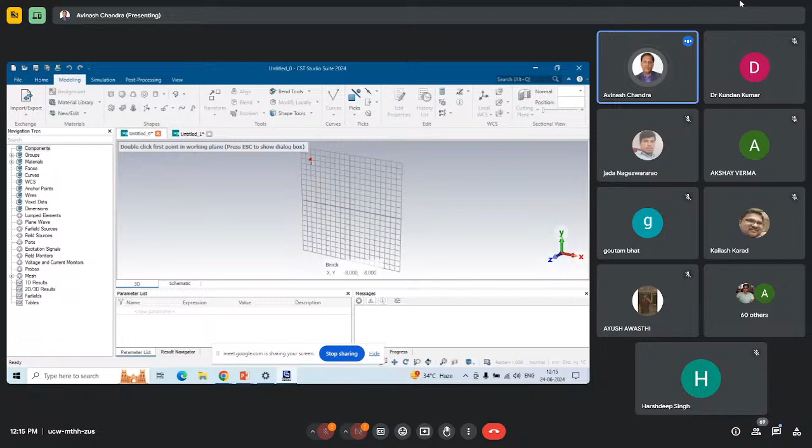So here I am going to design the waveguide by different techniques. I am going to put the dimension minus a by 2 minus t to a by 2 plus t. T is the thickness of the waveguide. Y dimension is minus b by 2 minus t to b by 2 plus t. B is the narrow wall dimension of the waveguide. Actually, here I am going to create a sheet first. So I am going to put the thickness 0.

Two things are there. Either you can design two waveguides and subtract one from another, since a hollow metallic pipe is also a waveguide. But here I am going to do it differently. I am going to design the waveguide by using sheets. So for material, you can put pure copper, aluminium, or PEC. I am going to select PEC.

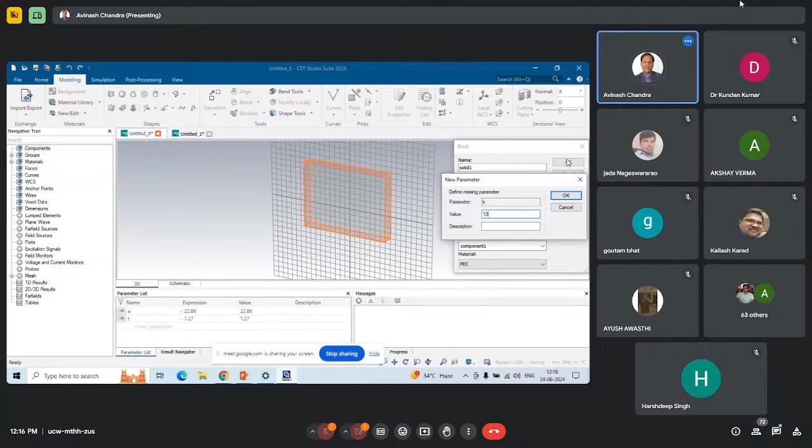So if I click here, initially we have put in the parameters. A is your broad wall dimension, B is your narrow wall dimension, and T is the thickness of the waveguide. So I am going to design the waveguide. What is the dimension for the broad wall? That is 22.86. Then thickness, I am going to put 1.27 millimeter, and the B dimension, the narrow wall dimension, is 10.16, right? So I have created one sheet. Again I am going to create one more sheet, right?

So here I am going to put the dimension like A by 2 to plus A by 2, minus B by 2 to plus B by 2, 0, 0, right? So we have created the two sheets. What I am going to do now, I am going to do the Boolean operation. So I am going to subtract 1 with 2.

So here you can see that Boolean operations are there: add, subtract, intersect, and insert. So I am going to subtract. We have to subtract solid 1 with solid 2. So just press enter. So it is going to be selected. What I am going to do here, I am going to extrude the face of the sheet.

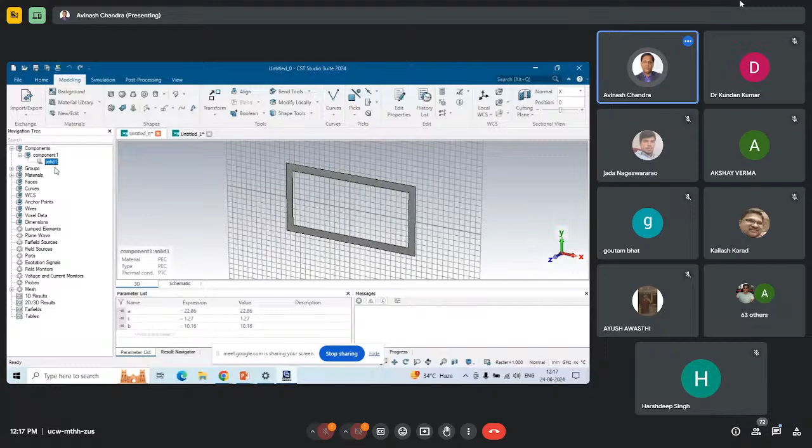So first I am going to select the face of this sheet. So just click on the F. Otherwise we have the picks there. In the picks, some shortcuts are also there. Like if you have to select any edge, you just press E. If you are going to select a face, just click on the F. Otherwise, here you can pick any one. Let us suppose that I am going to select the face. So just pick the face.

So once the face is picked, now I am going to use the extrude options. The face is going to be extruded. So let us suppose that we have to design a waveguide that has a length of 100 millimeter or 50 millimeter. So in the height, I am going to put 100 millimeter, right? I am not going to twist and taper. In the upcoming slide, the same waveguide I am going to twist and taper.

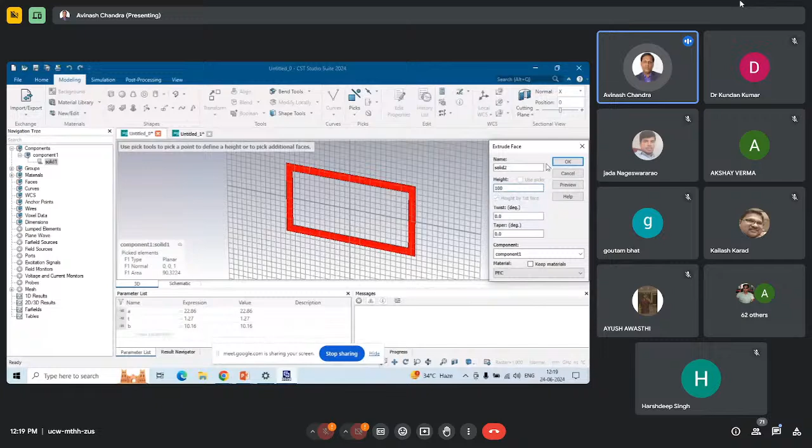For planar structures, so many tutorials are available on YouTube, but for the waveguide, there are some conventional approaches to design it. I'm not going to follow the conventional approach, because if you are going to design some annular waveguide, it is very difficult to bend or to twist the waveguide, right? So here I'm going to put the height. So you can observe here.

So again, I'm going to do the Boolean operation. So just add both solid 1 and solid 2. Fine. So you can see here, this is the waveguide. So I'm going to measure the dimension, whether the dimensions of the waveguide we designed are correct or not. So I'm going to pick the edge. So you can observe that here the broader wall dimension is the same, 22.86.

Now we have to delete the picks. So I'm going to press the D button. Otherwise, under pick, delete options are also there, right? So generally for edge or face, I'm going to use the shortcuts. For face, you just type F, for edge E, for point P, and D for delete. Let us suppose that by mistake I select any face and we have to deselect it. So just press D on your keyboard and automatically it is going to be deselected.

So once you have designed the waveguide, you know that a waveguide acts as a high pass filter. So every waveguide has some cutoff frequency. Let us suppose that this is an X band waveguide. Formulas are given in any electromagnetics book. You just use the formula to calculate the cutoff frequency of the waveguide. For this X band waveguide, we have a cutoff frequency of 6.56 gigahertz. But we are going to select the working range of the waveguide as 8.2 to 12.4 gigahertz.

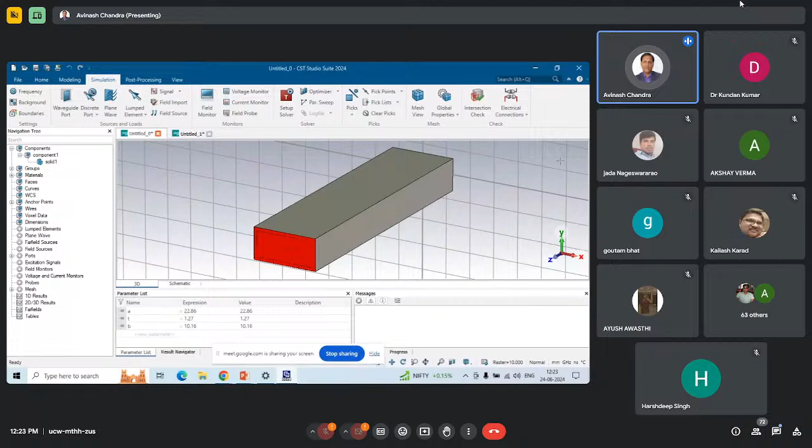So once you have clicked on the port, port 1 is going to be defined. You just rotate your waveguide to define port number 2. Similar steps you can repeat for port number 2. Just select the face, click on the waveguide port, and this port is going to be defined, right?

Once you have defined the port, you have to define the frequency. We know that this is an X-band waveguide, so the working range is 8 to 12 gigahertz, but we have to see the cutoff frequency also. So we can put 6 to 12 gigahertz, right? Once you click, automatically the boundary is going to be selected.

Now coming to the field monitor, we have to see the E field at what frequency. Automatically the frequency is going to become the center frequency. But suppose someone is going to check the field at different frequencies. For that, just click on the frequency list. Stay with linear, and they are going to ask what step size you want, like 0.1, 0.5, 0.6 or 1. So here I am going to put 1, right?

If I apply, in the navigation window you can observe in the field monitors that the E field is going to be at 6, 7, 8, 9, 10, 11 and 12 gigahertz, right? Once you have done these things, you have to start the simulations. I'm not going to start the simulations because we have to design a different waveguide.

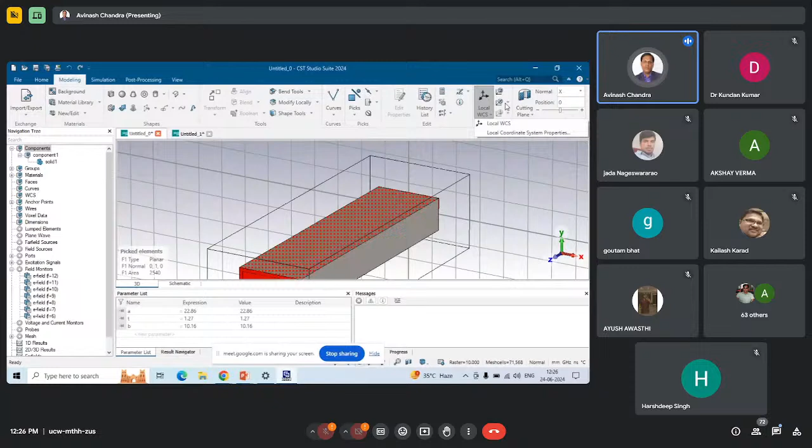Once you have selected the face, here we have a local coordinate called the WCS, right? In the local coordinate, we have two options. One is align with WCS. If you align with the WCS, automatically it is going to be at the center. We have selected a waveguide with a length of 100 mm, so at 50 mm your coordinate is going to be. But we are not going to design the slot at the center, because due to phase cancellation your slot is not going to radiate.

Let us suppose that we design a slot not at the center. In terms of the U and V dimensions, we have to design a slot that is 4 millimeters away in U and 10 millimeters in V. So we have to move our local coordinate also, right?

So just move the local coordinates. So they are going to ask how much differential length you are going to move. So let us suppose that in the U I am going to move like 3 millimeter, and in the V you can put the positive or negative values also there. So I am going to move like, let us suppose, 5.

You just see the preview. Before applying, you just check whether you have given the dimensions properly or not. If it is not proper, you just check your dimensions, right? Once you are satisfied with the dimensions, you just see the preview. Once you are satisfied with the preview, just click on OK, right?

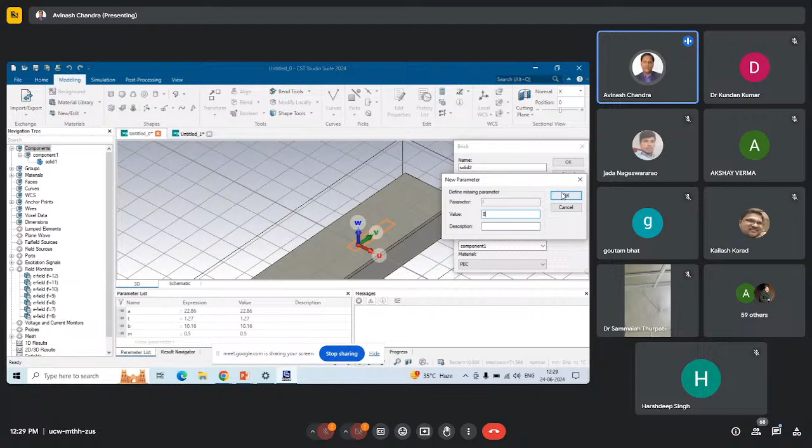Just click on OK. M, I'm going to put like 0.5. So the total dimension is 1 millimeter. L, I'm going to put 8. So minus 8 to plus 8, it is going to be 16. So now you have to repeat the same Boolean operation, because you have to subtract solid 2 from solid 1. So here you can observe that this slot is created in the waveguide.

Let us suppose that you have to make different slots. Every time I'm not going to make the slots, right? Here we have designed a slot. So now I'm going to use the translate options. Here in the navigation tree, you just right click on solid 2. Here options are going to come, right? In the options, you just observe that transform is there. Just click on transform.

Let us suppose that multiple slots we have to create in the waveguide. So every time I am not going to put the slots, right? Let us suppose that at a distance we have to create 5 to 10 slots in the waveguide. So we can just make copies of how many slots we have to create. You just see, after 10 mm one more slot is going to be designed. So I'm going to put a repetition factor of 1. Let us suppose that you have to design 5 slots. So you can do a repetition factor of 5. Repetition factor means how many slots, how many components you are going to design.

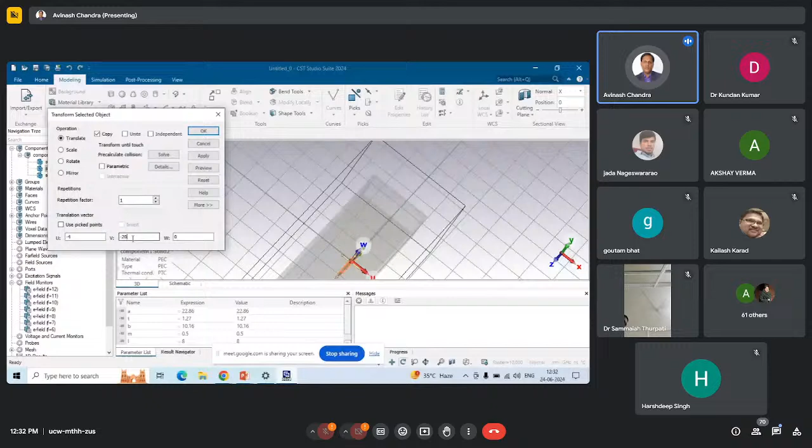Just check the preview. So we have created one slot. Just apply here, right? Let us suppose that you have to create one more slot. In U dimension, how much we have to move? Let us suppose that I have to move -4, and in V dimension, let us suppose that you have to move -20, right? One more slot we have to design, -20 or 24. Randomly we are going to do. So see here, one more slot is going to be created, right?

So once you have designed this one, what we have to do? Here I have created the 3 slots in the waveguide. So basically you have to subtract all the slots one by one. So do the Boolean operations, click on the solid one. Here we have the Boolean operation, the subtraction. Subtract how many? 3. All the slots we have to subtract in the waveguide. Just click on enter. So here you can observe that I have designed all the slots inside the waveguide.

Initially you have the waveguide. This is your slotted antenna. So power is going to be radiated through the slots. Same in the simulations we have 2 ports, otherwise 1 port you are going to just short it. So once you have defined the port, for the antenna we need the far field parameters. So here E field, H field, far fields are there. I'm going to just click on the far field. So automatically it is going to be on the center frequency.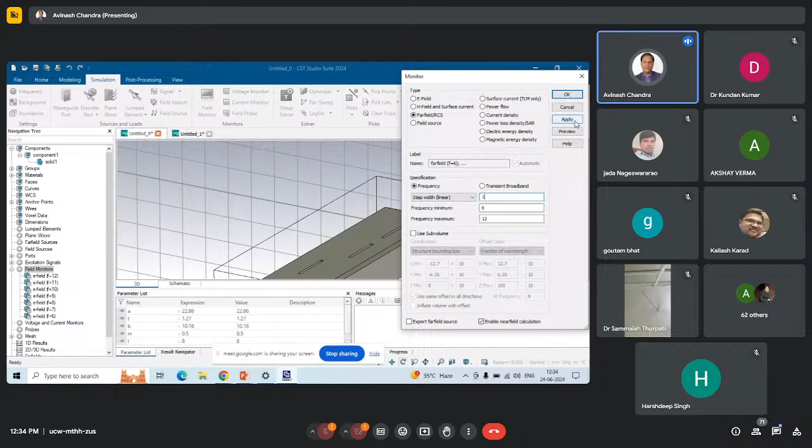So we have selected 6 to 12 gigahertz. So what is the center frequency? That is 9 gigahertz. But we have to see our radiation pattern at different frequencies. So we are going to give the steps with linear. They are going to ask how many steps, so we are going to put 1. So we can see in the navigation tree, field monitors are going to be at 6 gigahertz, 7 gigahertz, 8 gigahertz, 9 gigahertz, 10 gigahertz, 11 gigahertz, 12 gigahertz.

Once you have done these things, let us suppose that in the antenna we got the S parameter, we got the surface current distribution, we got the H field, we got the radiation pattern. Then one more important parameter is there, that is the gain, directivity, front to back radiation ratio. So for that one, in the window, you see after modeling, simulation is there. In the simulation, post processing is there. In the post processing, we have template based processing, that is called the result template. You just click on the result template.

In the result template, they are going to ask to select the template group. So we need the far field results, so I'm going to select far field and antenna parameters. Then they are going to ask to add the properties. We have to see the far field result, so just click on the far field result. In a separate window, different parameters are going to appear like directivity, front to back radiation ratio, gain or maximum gain over selected frequency. So I'm going to select maximum gain over frequency.

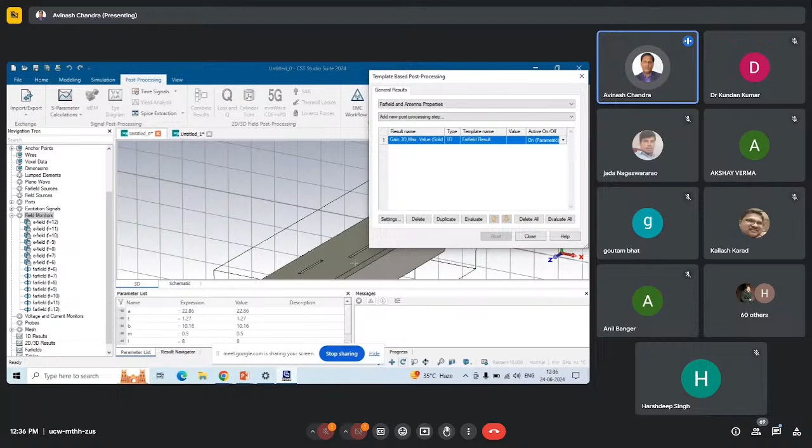So we just check the setting whether it is correct or not. Automatically it is going to be on broadband. If it is not on broadband, you just select broadband, right? This is the 3D. So just click on OK. So why have we selected this template based processing? Because once you have simulated your antenna, then again you have to repeat the same process. So if in the first simulation, the first iteration, you put all these things, you can calculate all the parameters in the first result also. Otherwise, again you have to repeat the same process.

Same for the antenna. This is a directive antenna. So we have to see, let us suppose, the front to back radiation ratio. So just click on the front to back radiation ratio. Let us suppose that some antenna is a circular antenna. This is a linear polarized antenna. So for a circularly polarized antenna, you have to see the axial ratio, right? So for axial ratio, you just select the directivity.

Here you have to do some settings, right? Here you just select the broadband. In the broadband, what is the operating frequency, operating band? For this particular case, I have selected 6 to 12 gigahertz. So that is fine. Then actually the axial ratio plot is a Cartesian plot. So in the output data type, by default it is going to be a polar plot. So we have to change it to Cartesian.

I'm going to select 1D Cartesian. And if you are going to measure axial ratio, or calculate the axial ratio, what we have to do is see in the broadside direction. So we have to put phi 0 and theta 0.

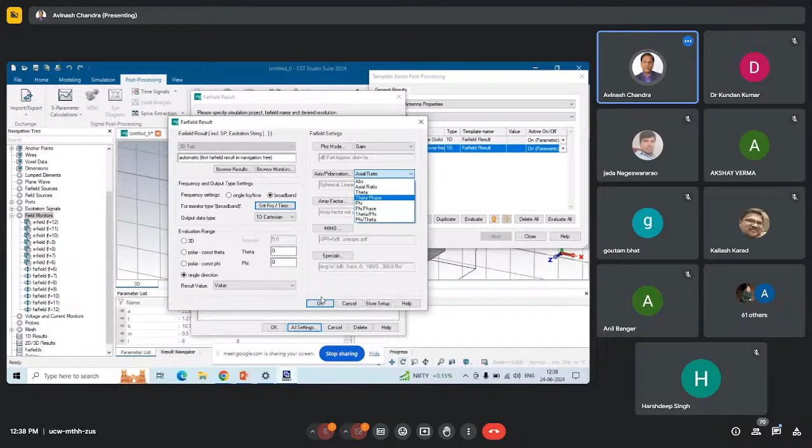So after setting the result template, you can start the simulation. In the simulation, we have the transient solvers, and they are going to ask for hexahedral meshing, so you can start. Here you can observe that meshes are going to be created depending upon which type of structures are there.

So once you have designed your antenna, do the post processing. After the post processing, you can start the simulation, or otherwise you can do the simulations directly. After the simulations, if you have given the broadband far field setting, you can also calculate gain, directivity, and axial ratio later, once you satisfy your results with the S parameters.

So this is one of the slotted waveguides. Let us suppose someone is going to design a twisted waveguide, or a horn antenna, or maybe any type of asymmetric structure, or any annular waveguide. Especially UG and PG students want to know how to design this type of 3D structure, so I'm going to illustrate these things within a couple of minutes. Same process, we have to repeat the modeling.

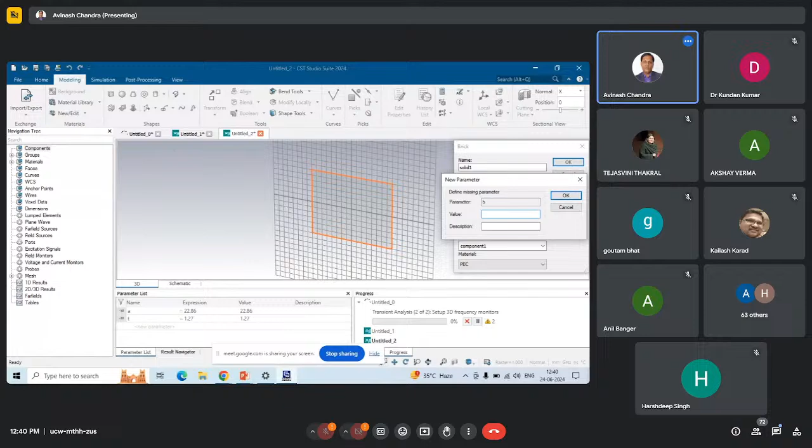So here I'm going to create the sheet. Same steps are there, so directly I'm going to design it, minus a by 2 to same, I'm going to put all these values. They will ask what is the dimension of A, what is the thickness of the waveguide, what is the dimension of the narrow wall. Once you have put in all these dimensions, then create the second sheet.

So that is minus a by 2 to plus a by 2, minus b by 2 to plus b by 2. Here thickness also I am going to put as 0. Now why am I going to take the sheet? I'll explain. Now we have to extrude our waveguide. Now what we have to do is design a twisted waveguide. Let us suppose the twisted waveguide has a length of 160 mm.

I'm going to put any route— sorry to interrupt you, sir, actually time is approaching. Oh, just within 5 minutes I'm going to conclude. Okay, fine.

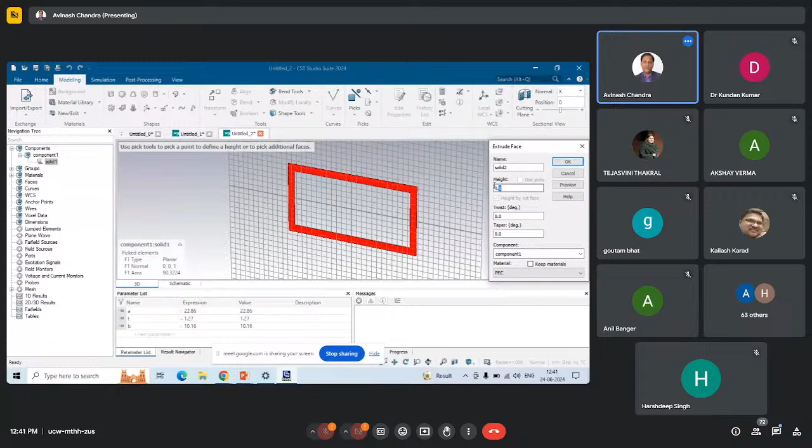So I'm going to put here the height. Height is 160, and how much twist do we have to apply, like you have to twist your waveguide 360 degrees, right? So you just see here how we have designed this twisted waveguide. Let us suppose you have to taper your waveguide, so the same procedure applies. Just select the face.

And for a horn antenna, tapering is involved. So let us suppose I'm going to put a height of 100 mm, and a certain tapering angle. If you know the tapering angle, that's fine. If you want to change the tapering angle, you can change it. You can also put in the twist. Let us suppose you can see how it is going to be twisted and tapered.

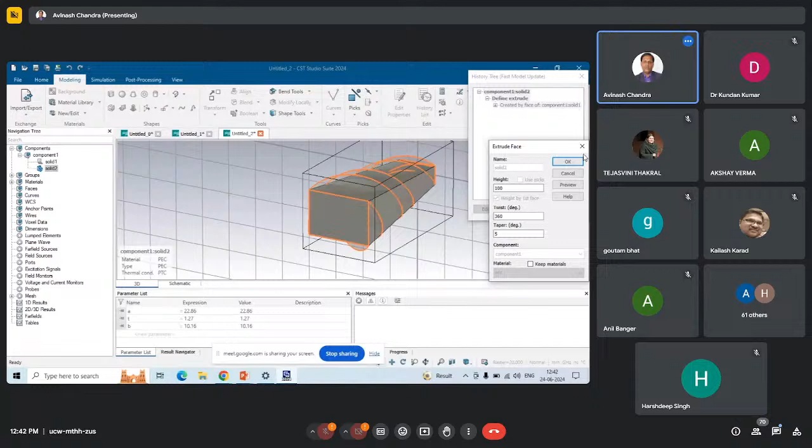And also with the slot, let us suppose a twisted horn is there. If you look at the literature right now, very few contents are available on this. So like that, you can design different types of waveguides. For planar antennas, we don't have the time—this discussion, if we design any magic tee or any gap type of waveguide, it would take more time. So we have designed different types of antennas. I am just going to show them.

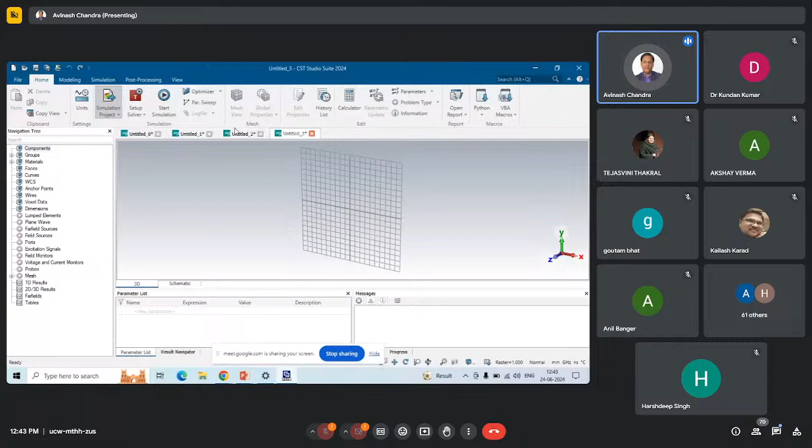I think it is not available in my desktop. Fine, I'm just going to show the results since Kundan told me we don't have time. I have to conclude the session.

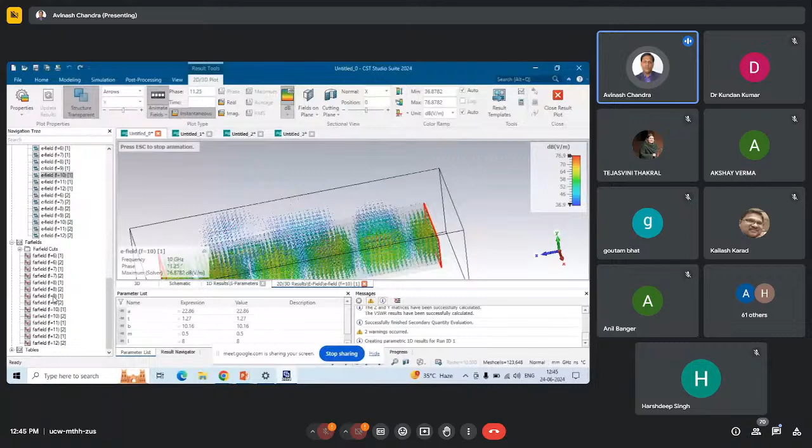We can also observe the far fields here. In the far field, suppose I select 9 gigahertz, the radiation pattern is going to become like this. Here also you can see the structure, and here you can observe how the slot is going to radiate.

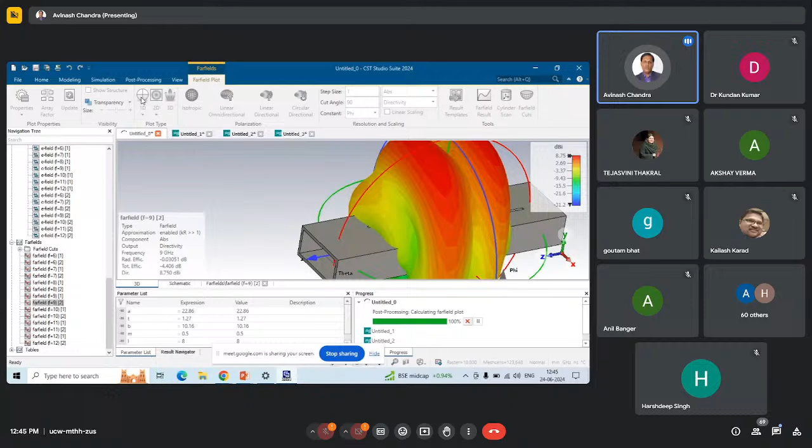In the 3D pattern, we have designed the slot on the broad wall of the waveguide, so it is going to radiate through the slots. But we have to see the co-pole or cross-pole, so for that I'm going to see the polar plot. In the polar plot we have the absolute values, and you can see both the co-poles and cross-poles.

Once you have checked these results, I have already given the result template, so you can check the gain and directivity. The gain is almost 8.78 dBi.

At 9 gigahertz, our gain of the antenna is 8.9. This is a directive antenna, so the front-to-back radiation ratio is also there, around 20 dB, and this antenna is linearly polarized.

You can observe in the graph that we are not getting the axial ratio bandwidth, the 3 dB axial ratio bandwidth is not there, so this antenna is linear polarized. Suppose your antenna is circularly polarized, then the axial ratio bandwidth is going to appear. Based on that, you can check the results.

On this note, today I am going to stop my discussion at this point. We have very short time, so I have not designed all the antennas. If you have any doubts, you can tell me.

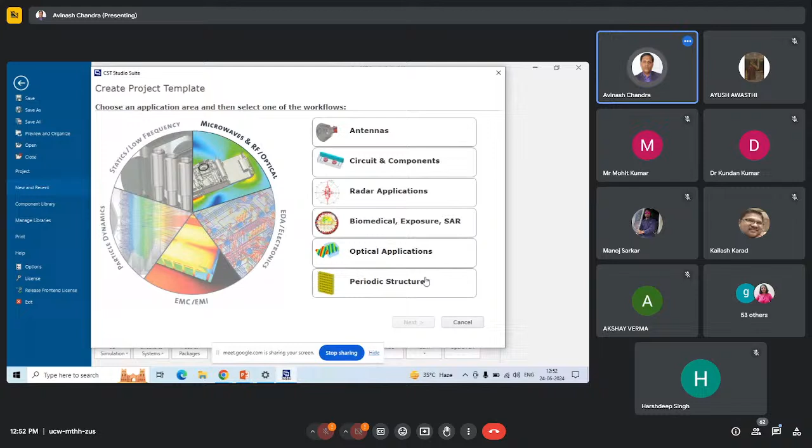Let's suppose they ask where you are going to work—periodic structures are there. In periodic structure, FSS and metamaterials are there—frequency selective surface, metamaterial, like that. So there's no need to define the boundary. Don't worry about the boundary.

Let's suppose you selected a different template—in that case you have to do the background settings. But in CST, in the recent versions like 23, 24, they have upgraded everything for metamaterial and FSS structures. Once you've done the initial settings, there's no need to do the boundary settings. That's the advantage in CST, right?

Also in the CST window, you can see Python settings are there. Right now, some antenna coding techniques are needed, so you can embed your code in Python. Once you've written it, you embed your code with Python and see whether your result is validated or not. In CST 24, 23—after 2022, so many new sections have been embedded in this software. Fine, so no need to worry about any boundary conditions.

If you are going to work on HFSS, then you have to worry about the boundary condition. In CST the boundary is already defined. If you want to check, you can check the boundary also, because they have the predefined boundary, based on what technology is going to be available. Let us suppose that you are going to work in a new technology. For new technology, if you are going to set the boundary parameters, then you can set the boundaries here, which type of boundary you are going to need, right?

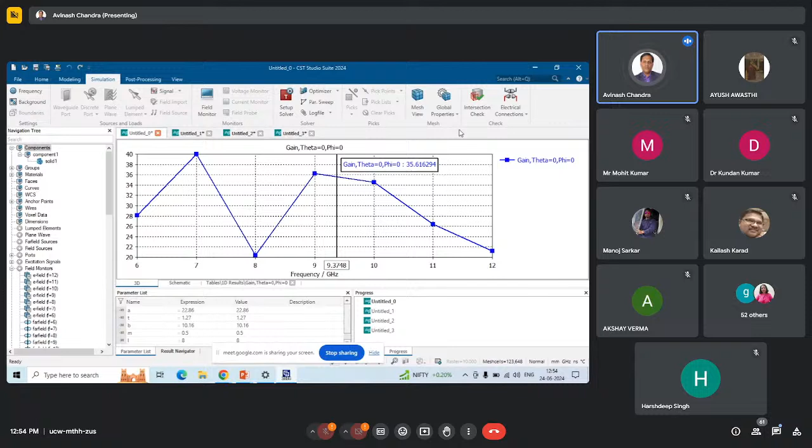Yes, sir. Thank you, sir. Sir, what about the mesh settings? Why is it so necessary to tinker with the mesh settings? Mesh settings are not required in CST right now. Right now, it is not going to be required. Okay, sir. Thank you, sir.

Yes, sir. So any more questions from the participants' side? Hello, sir. Sir, a very nice presentation by you, sir. Thanks to you a lot. Welcome, sir. I have one question, sir.

At the end, you have shown bending of a waveguide. Does it affect the radiation? Bending also, definitely. Bending and twisting are basically used for the slow wave structure. So definitely it is going to affect the radiation. If you are going to design a twisted waveguide, like a slotted waveguide or bending structure,